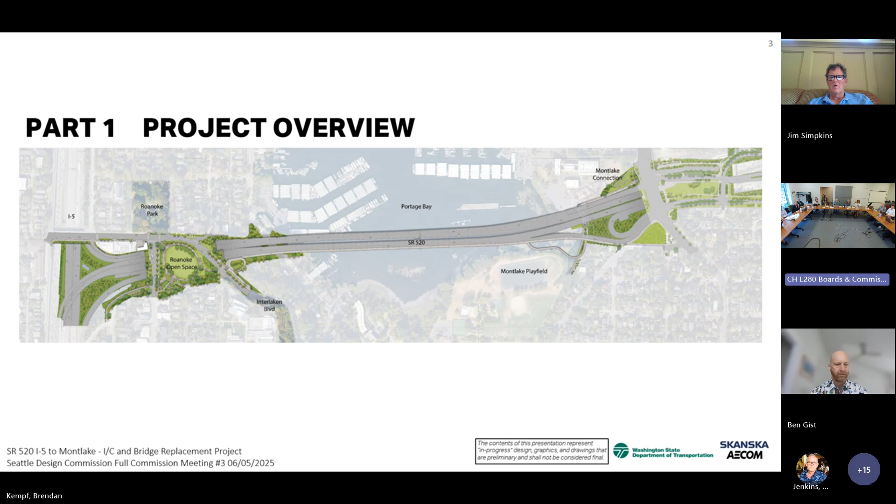Project overview. We've all seen this slide a couple of times now, but just want to highlight the scale and expanse of the project, picking up from where the Montlake phase left off, carrying the culmination of the 520 program across over Portage Bay into the I-5 interchange, and with our Roanoke open space, the lid that's going to reconnect North Capitol Hill and Roanoke district neighborhoods.

Zooming in a little closer, this slide highlights a number of key areas around the west side here at the interchange and the Roanoke lid. Central, of course, is this great lawn at the center point of the lid, the open space itself—really a connection from Interlaken Boulevard, the green belt there, to Roanoke Park on the north side. So really an extension of these legacy Olmsted Brothers parks. Tremendous opportunity here, very exciting for all of us to be working on, and just re-knitting this community, having this great central point here at the lid.

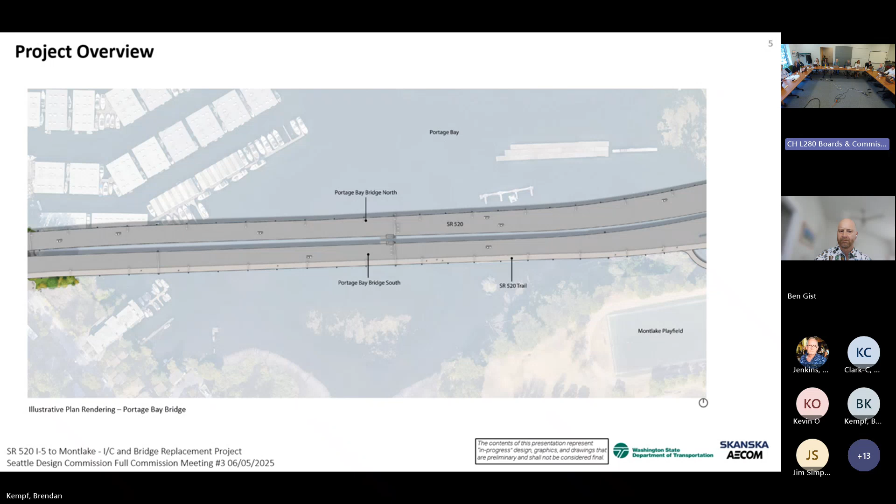Continuing across the bay to the east, we have Portage Bay Bridge, both north and south bridges. The SR 520 trail will be part of the south bridge, connecting all the way to points eastward into Redmond and beyond, part of a really large trail network. And then lastly, the eastern portion—you can see faded out slightly—the Montlake Lid area, the Montlake phase, and the connection in between. So really how Portage Bay Bridge is touching down on the east side of Portage Bay, and those connections to the local bike trails, as well as that regional SR 520 trail.

I already highlighted this—the three major elements of the west end: the Montlake Lid, the bridge itself, and finally the Roanoke Lid and that interchange area. Also note, we do have an additional bridge, the I-5 Roanoke Trail Crossing Bridge, which was the focal point of our very first presentation with you all. Also one that we'll be discussing in our next touch points, but not the focus of today's presentation.

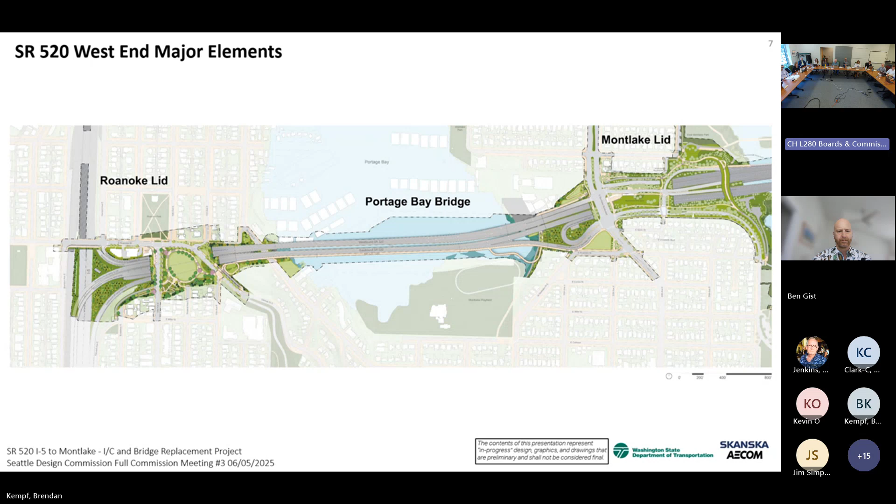A couple more slides here just helping to set the stage and highlight that regional trail network and the importance of what this project is bringing. So of course, the SR 520 trail going all the way across Lake Washington over to the east side, extending through Bellevue, Redmond. This is the last piece that's going to pick up from where the Montlake phase left off, get that network, that trail across Portage Bay and into all of these opportunities beyond, whether it's Roanoke District, North Capitol Hill, even downtown, East Lake.

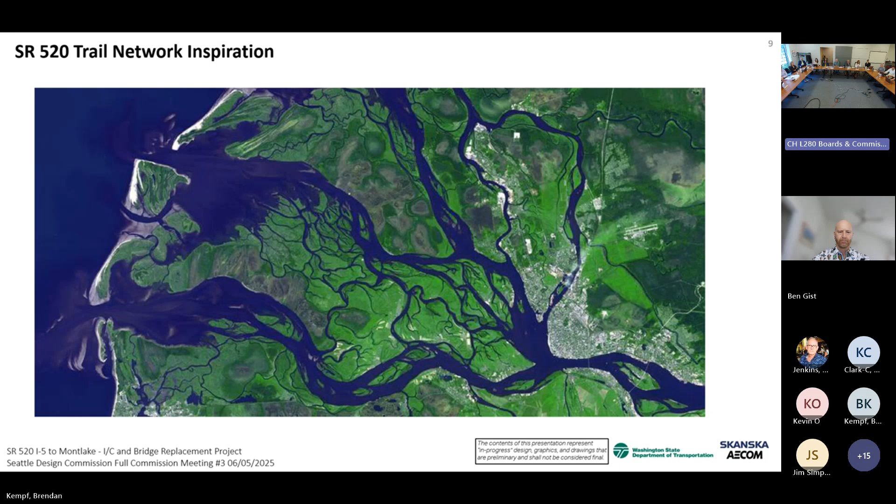By the time we get this image, it's kind of very representative of the initial design concept—as you arrive at this point, this delta, this distribution, all of these different trail opportunities that are going to emanate from this project.

So where are we today? You noted earlier the main thrust of the project really picking up in 2019 with the conceptual design, RFP development, and procurement. Today we're in the midst of the design-build effort, and so obviously continuing to have these touch points with the design commission, getting input and feedback along the way.

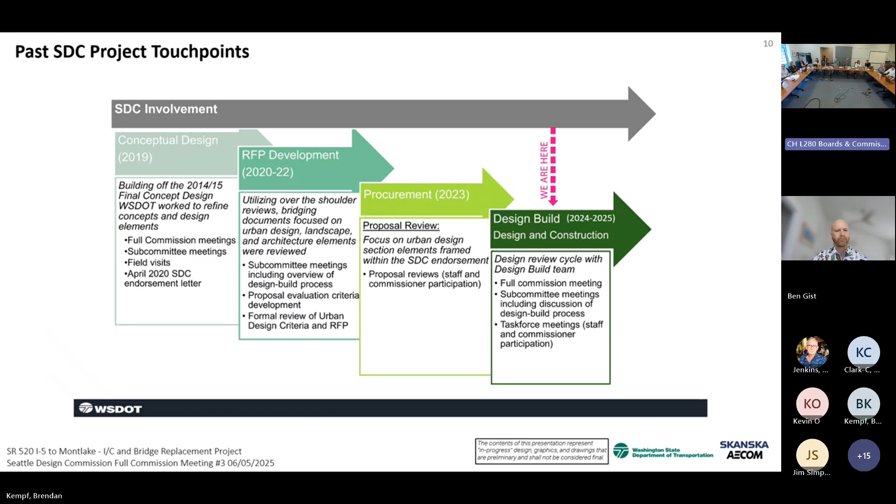Just to quickly step back, in terms of the delivery of the project, we have a series of packages encapsulating different portions of the project. We have three packages addressing the landscape architecture and urban design: the first initial package for the I-5 Roanoke Trail Crossing Bridge, then a west package and east package. Today we're really culminating on those two packages. We also have wayfinding, which will feature heavily today, bridge architecture—that was the focus of our last meeting—and then fire life safety building, which we'll touch on briefly today as well.

On the bottom there, you see the progression of the design submittal process. We are at this culmination point of the preliminary design phase, on the cusp of going into the next stage of WSDOT and City of Seattle design review, and then progressing into the final design stage.

This is the finer point: this is not the last time you'll see us, but this is the last time you will see us in the preliminary design phase. So this presentation is the culmination of all that. We will be coming back for an additional subcommittee workshop, as well as a full commission presentation, just like we're doing today, during our final design phase.

As we get various stakeholder and agency feedback after our preliminary design, we'll work on incorporating all of that, and as design progresses and refinements materialize, we'll bring that back to you for an additional update. Today our focus is really going to be project-wide on the landscape and urban design, touching on materiality and finishes, planting approach, focusing on portals and gateways, and the overall experience and how wayfinding ties into all of that.

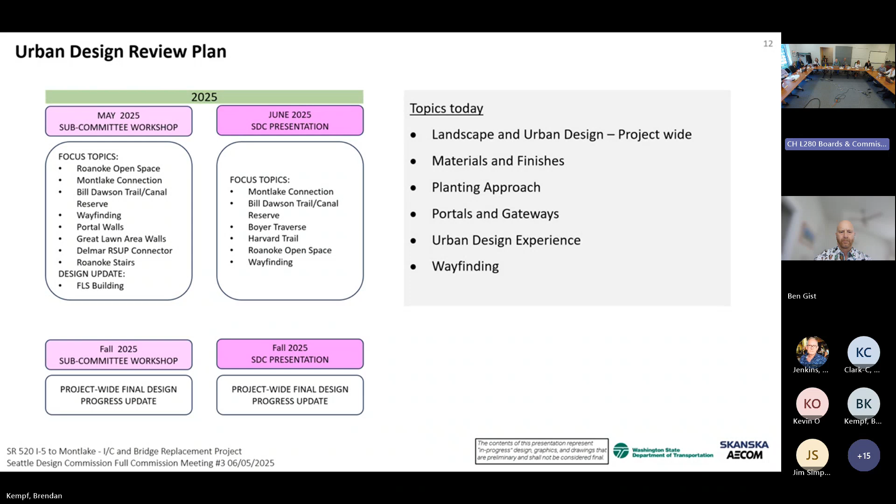Skanska, the builder for the project, is also hosting a series of annual open houses, with another one coming up this summer. Generally, these design packages will be passed along to representatives of that Section 106 group, and there will be opportunities for stakeholder review and comment during the preliminary and final design stages.

Jumping back into the overall connectivity—don't want to belabor this too much since we've seen it before—but highlighting again the multitude of connections out into the community from this project, centered on both the Montlake connection area and, even more importantly, the Roanoke Lid area, the terminus of the SR 520 trail, and all the opportunities out into the community and neighborhoods for connection.

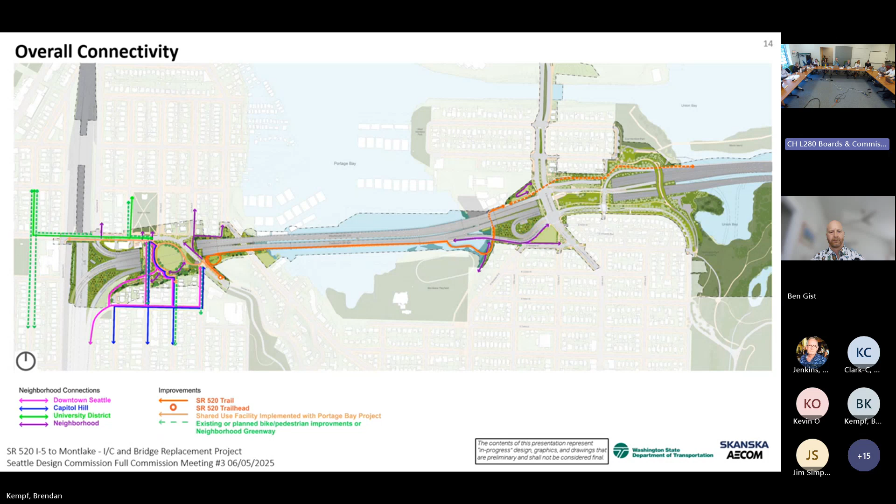This is looking a little more closely. You can see the more recent SR 520 trail segment dashed in orange, connecting through underneath Montlake Boulevard with the tunnel there, continuing on to what we call the Bill Dawson Trail and the Bill Dawson Underbridge area, which we'll see in just a moment.

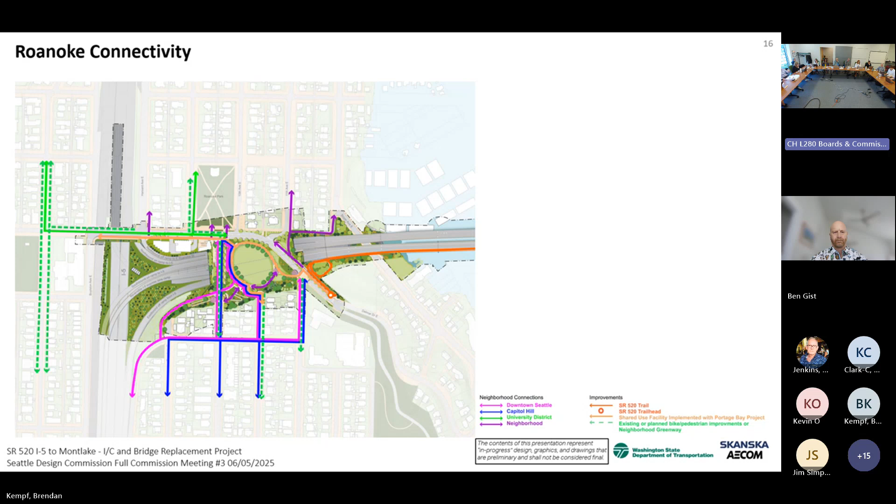On the west side, these dashed areas represent existing or planned neighborhood greenways that are going to be implemented, future bike trails and bike lanes associated with city streets, and connections into the Roanoke District, North Capitol Hill, East Lake, and downtown beyond.

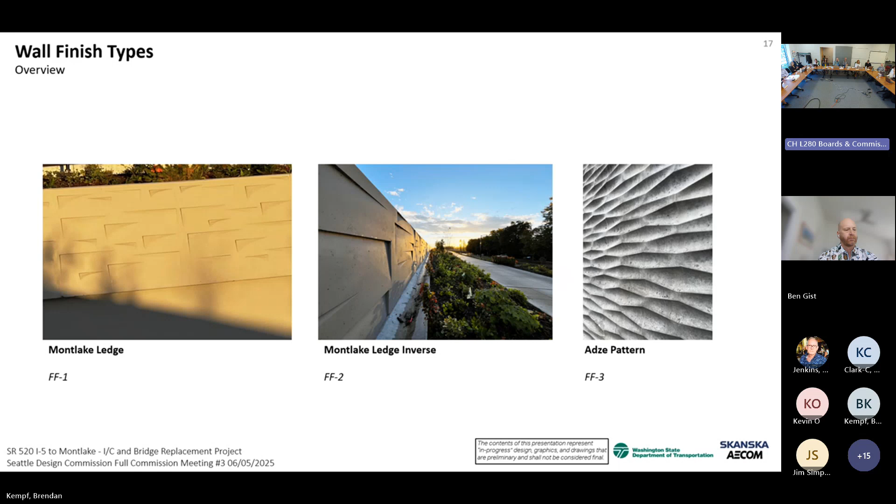In terms of general appearance, materiality, and finishes, this project in many ways is an extension of the Montlake phase, so we're carrying through some key design elements—the Montlake ledge pattern, and the inverse of that pattern, featured heavily on the roadway and roadside walls. For the more pedestrian-scaled walls, we're incorporating an adze pattern, a finer pattern more suited for the pedestrian-scaled spaces where people will be walking and cyclists passing by.

In terms of railings and lighting, the palette from the Montlake phase is getting expanded slightly. We've introduced a transitional fixture, part of the SCL standard catalog of light fixtures, that will feature on the west side of Portage Bay. The marina fixture is a consistent extension of the light fixtures used throughout the Montlake phase, so on the east side of Portage Bay we'll have that continuity. As we transition into the west side, the transitional fixtures will appear in many of the views of the study model as we go through this presentation.

What drove the move towards this transitional fixture was that it has a larger throw for light, so we need fewer of them, resulting in much less visual clutter throughout the open space and other areas. Also, for the bridge columns on piers 2 and 3, on the west side of Portage Bay, we have uplights that will help illuminate and accentuate those columns.

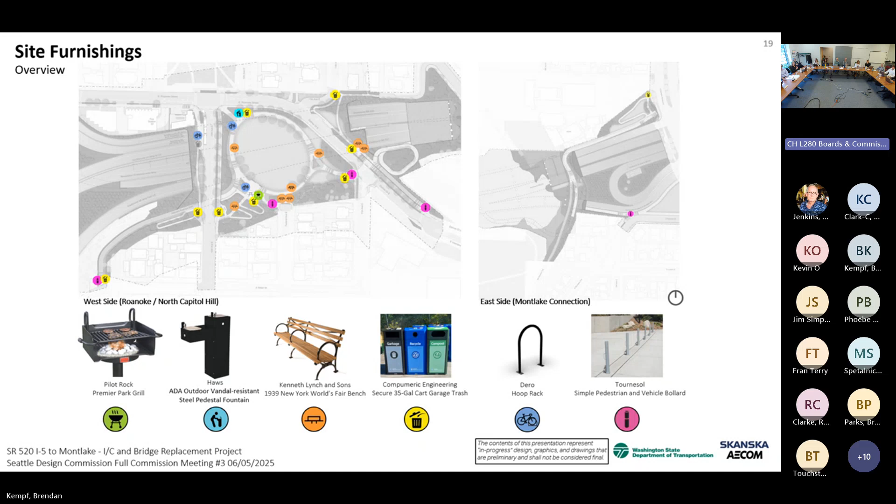In terms of site furnishings, expanding on many of the City of Seattle standard kit parts, we're introducing the World's Fair bench as a nod to the Olmsted legacy, originally designed as part of the 1939 World's Fair. That's a key element that harkens back. We'll also have a grill, drinking fountain, typical City of Seattle refuse collection receptacles, removable bollards at key points, and bike racks.

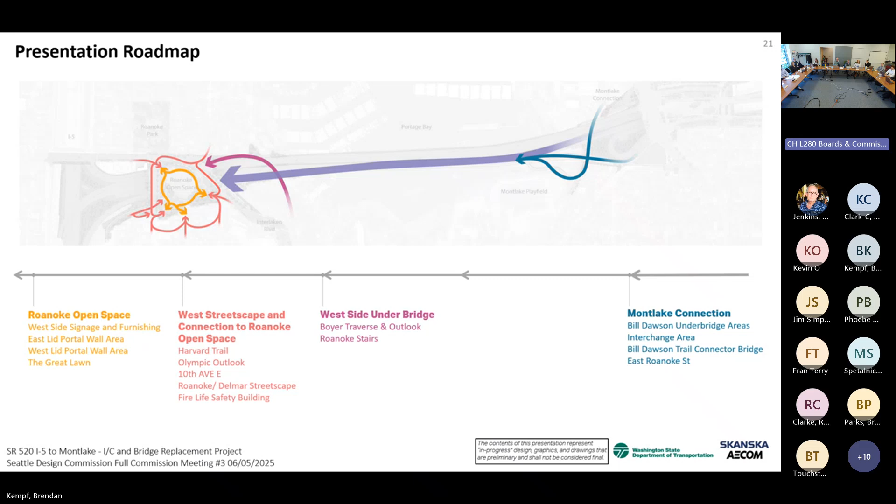Real quick, our roadmap: as described before, we'll start going from east to west with the Montlake connection area, quickly go over Portage Bay, the west side, the underbridge areas, streetscapes, the connections into the Roanoke open space, and lastly the Roanoke open space itself.

With that, we'll get started on the Montlake connection. As we go through some of these, we'll be harkening back to the original design concept and highlighting how the design has progressed along with some of the refinements.

So we don't have an additional secondary wall, and we avoid additional construction disturbances and impacts to the fencing at that NOAA facility. This reinforces the intended movement path for pedestrians and cyclists accessing the Bill Dawson Trail from above on Montlake Boulevard.

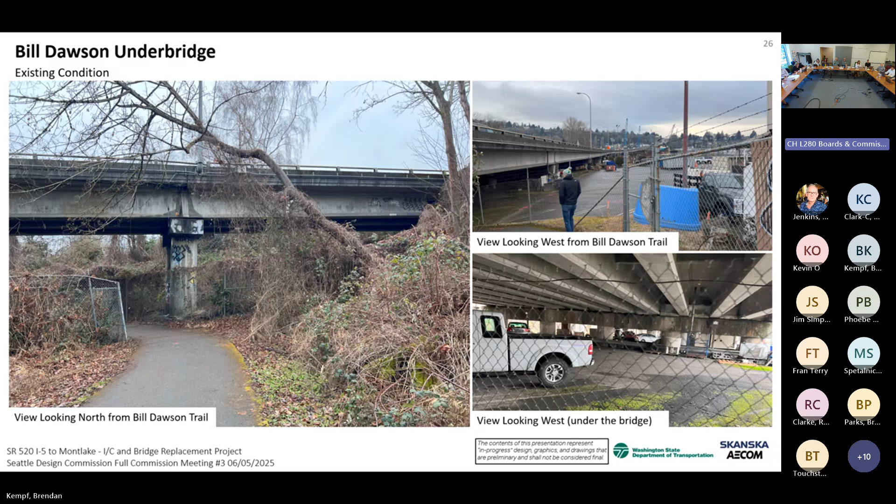This is what it looks like today. It's not the most inviting of places. It's been overgrown over time. You can see the NOAA facility is pretty much right on top of it. There's an area underneath the bridge today that is used by NOAA for some additional parking area, and just generally some kind of low head height clearance going underneath that bridge. So those are some of the challenges in this existing condition that our project is looking to improve upon.

This is the area underneath the mainline bridge, so both Portage Bay Bridge North and South, as they're touching down at the abutment wall that you see here behind this fascia wall.

All the walls across the project are numbered, so forgive me if I throw out a wall number, I will try to clarify all of those. But this particular wall is 90L. You can see that it's got this arcing, curving profile. It's also battered on that face, similar to some of the roadside walls, with its 10-to-1 batter.

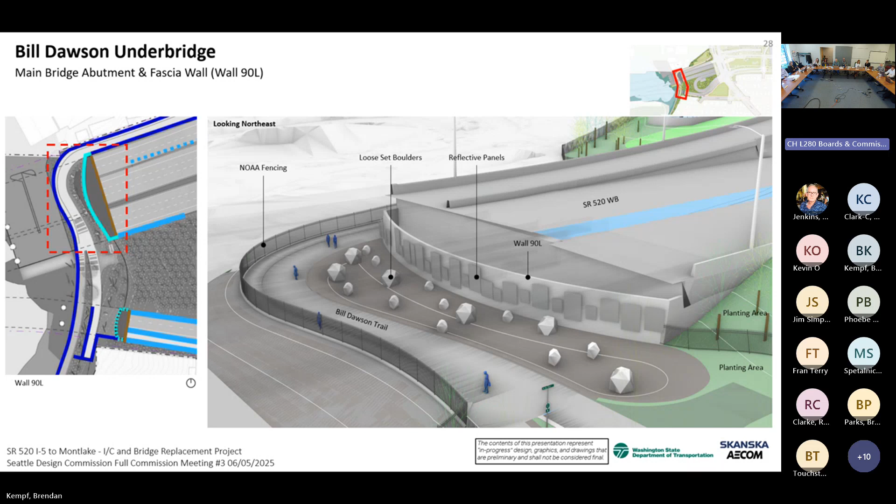This is new fencing, right? We saw in the images earlier that was primarily an unappealing chain link fence that wraps around. So we'll be picking up on the design language of the wrought iron picket type of fencing along the majority of the NOAA property and carrying that on through to help secure that parking area. We'll talk a little bit more about that in a moment.

Going back to these reflective panels, it's a series of stainless steel panels that will be mounted to that wall. There will be lighting in the girder bays that provide downlighting directly over the path, but there will also be girder wash lights pointing back towards this fascia wall, helping to reflect light back and off these reflective panels so that there's more light being displayed and bounced around in this space.

So it's not like there's a dark area off of the trail. We're trying to make sure that there's a good, consistent light level all the way through, so that this doesn't have that same underlit or dark quality through it. It should be very well lit.

As people are moving past these reflective panels, you'll see that subtle effect - it's not a mirror finish, so you won't be able to comb your hair in front of these things, for instance, but you'll see the color and movement will still reflect off of these and help animate that space. Of course, we're getting into all the details of exactly how these things come together, being mindful of serviceability, how they'll be installed, and how they'll be able to be maintained in the future.

The stainless steel elements also include a component of bird netting that helps keep birds from being a nuisance in that open space behind this fascia wall and the abutment wall itself. That open space is critical to the bridge preservation aspect of the project, so that there's access into that space through a man door, so that inspection personnel are able to inspect the bridge and the abutment as needed.

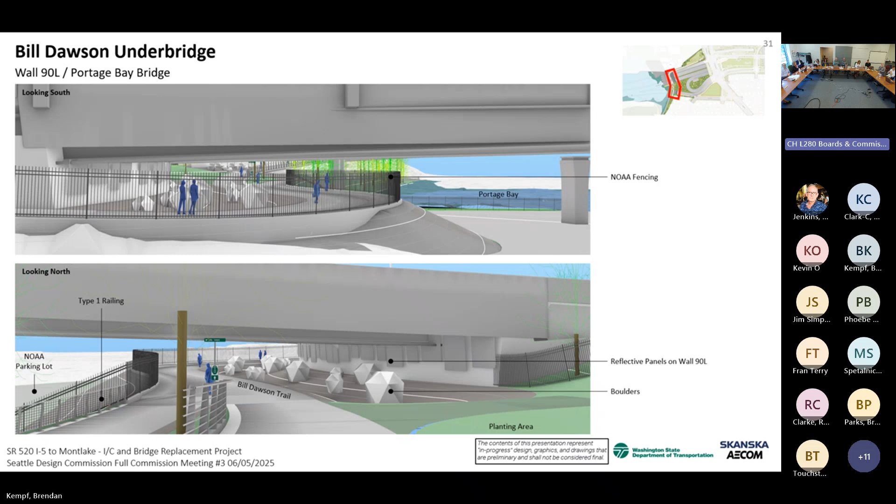Couple views here, looking at that space. This is pulled from our study model that we've been using to explore all of these areas. On top, we're standing inside the NOAA facility, looking south underneath the bridge, and you can see the fencing as it goes through. On the lower image, looking directly opposite, from the sloped walkway that leads up to a bridge connecting to Portage Bay Bridge itself. So you can see into this space from both directions, as well as a more photorealistic rendering highlighting the space.

I know scaling was a topic at our last presentation, and that's one of the things we've been very focused on truing up since our last touch point with you all, moving into a series of more detailed sections through this space. I think this will help highlight really what the scale and dimensions are through this area.

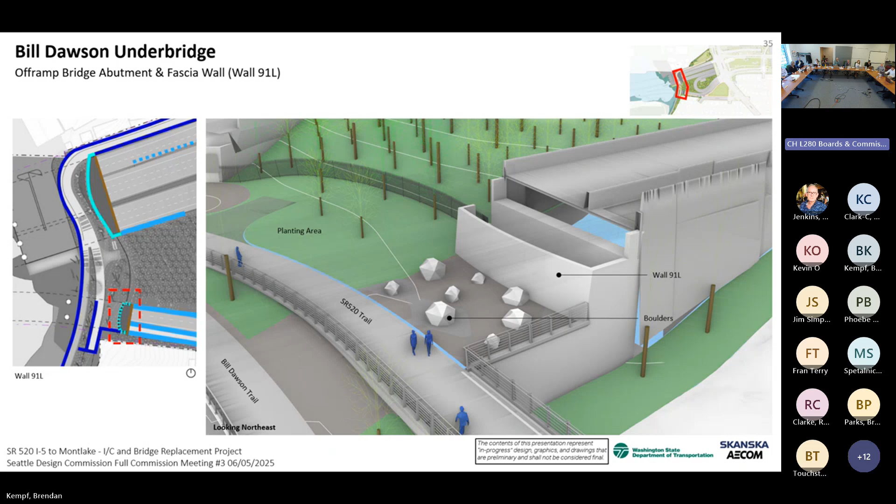Transitioning to what we affectionately call the WABN railing, which is from the West Approach Bridge North design language, that carries through alongside the SR 520 trail. Since we're transitioning onto that trail officially, and then another bridge structure, that railing type starts to come into play here.

Where do you lose the NOAA fence and where does this one start, and what is that intersection? Excellent question - there will be a graphic in a moment that'll better illustrate where those come together.

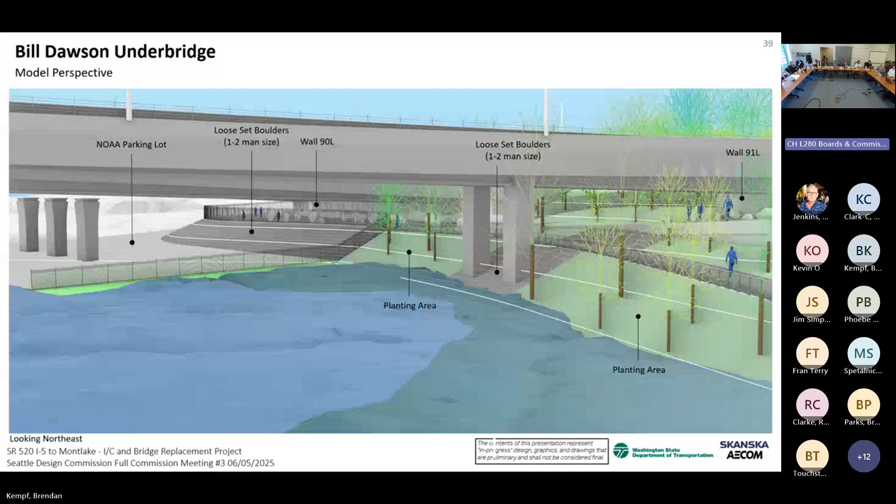For the areas underneath the bridge itself, something we're still working on refining, but trying to pick up on the same rockscape design language that we have on the other side of the trails in front of those abutment walls, and carrying that through. These are spaces that are not going to get as much light, and more importantly, aren't going to get any natural rainfall, so viability of plants in those spaces is next to nil. So we're carrying through that rockscape theme for the underbridge zones.

This is another view looking back through this space. This is pretty much that section we were looking at a moment ago, where we're standing at that interface with the bridge structure. You can see the shadow line and the rockscape treatment directly into the abutment area. There will be habitat logs as well as boulders set in that space. You can see the WABN railing type here, a little different from the pedestrian railing, but carrying through to the terminus of this portion of the trail as an extension of that bridge railing type.

Also touching briefly here on the interstitial space in between the bridges. This area is solidly within the highway zone itself. This is the on-ramp from Montlake Boulevard to 520 eastbound.

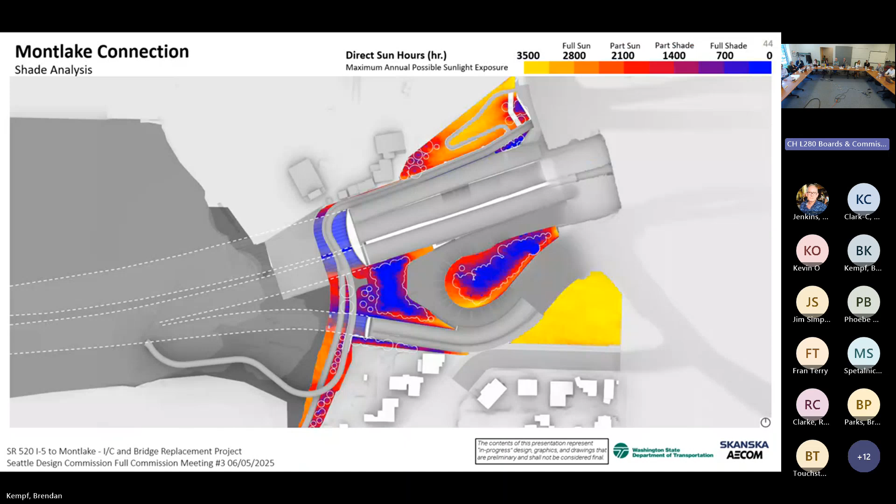In terms of the planting design, one of the things underpinning the design choices here is looking closely at shade analysis throughout this area. We're being very mindful of where we're up against tall walls, creating really shady zones. You can see the areas directly under the bridge are quite shady indeed.

Where there's some more open spaces, for instance over at that Montlake connection area, that switchback trail, it's more open where there will be some lawn spaces. We're continuing to work with landscape architects, with WSDOT, with Seattle Parks and Rec, as well as Seattle DOT for identifying and being on the same page with what the plant material will be, being mindful of maintenance considerations from each agency, as well as the microclimate conditions that will be created by the project. You'll see a series of these kinds of diagrams as we go through the presentation—it's one of the main things underpinning that planting design approach.

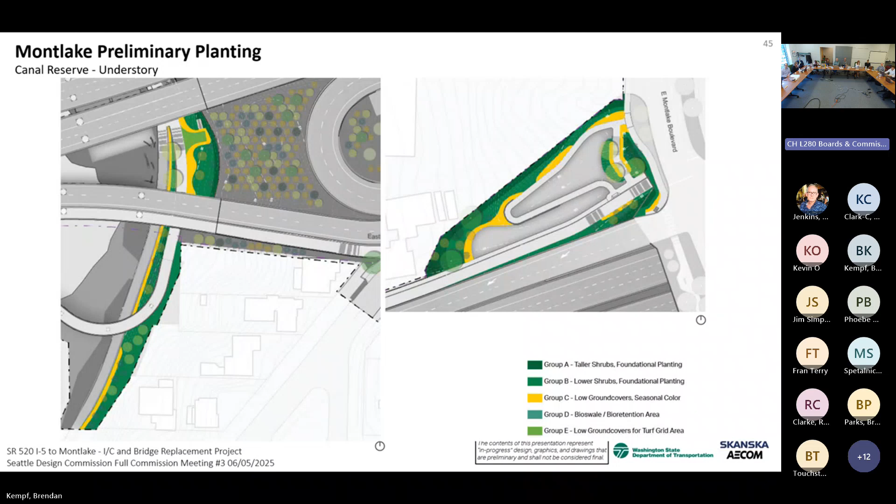In terms of the approach, it's really a matter of layering the plant material. Where we are against or near pedestrian zones, we're looking at lower plant material, being able to introduce seasonal color and accents, so it's a little more interesting. Then as we step back, we start layering in more foundational plants, lower shrubs, and ultimately taller shrubs when we get out to some of the edges of the project. So it's very much an outward progression of height, density, and layering for that plant material.

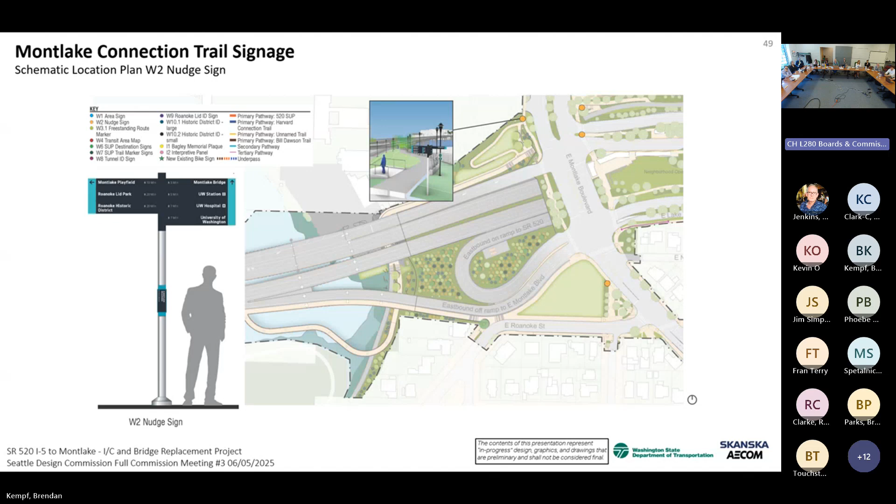And then we're also locating the nudge signs in several areas as well. Pedestrian oriented signage on the periphery, and then when we get into the trails and stuff, it'll be more bike oriented signage. And then there's a tactile portion that goes on both the area sign and the nudge sign.

So that we're starting to get those laid out and what those are going to start to say.

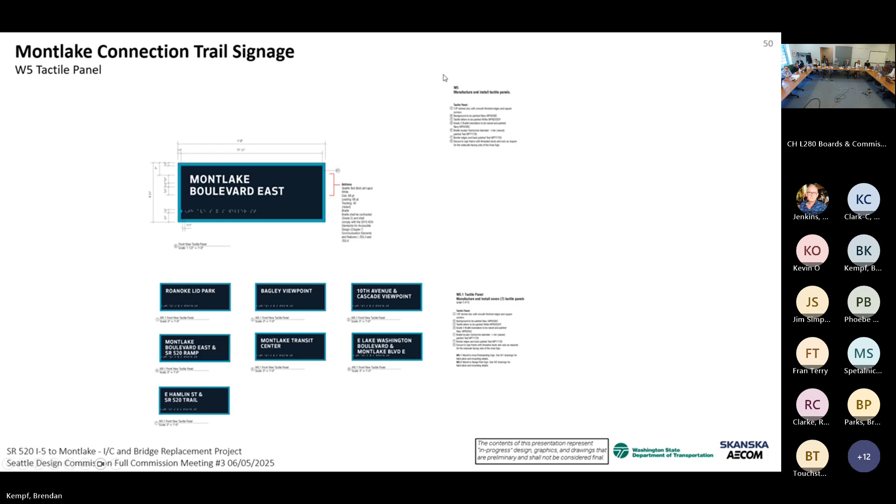And then we've taken vignettes from the model to indicate where signs are going to be going, what they're going to be looking like in that space. We've also identified where there's existing bike signage from the Montlake project. It's already out there, so it's a little bit of an overlap for the scope of work that we have, to where they're kind of meeting up. So we know where those continuations are happening from one project to the next.

Again, the Montlake tunnel identification, and then the transit area map that will go into the transit center there, Montlake.

Picking up from that, the Montlake connection area, we were looking at the underbridge zones, that split where the Bill Dawson Trail happens and continues to the south, and then the elevated path that is really the SR 520 trail that leads up to Portage Bay Bridge South.

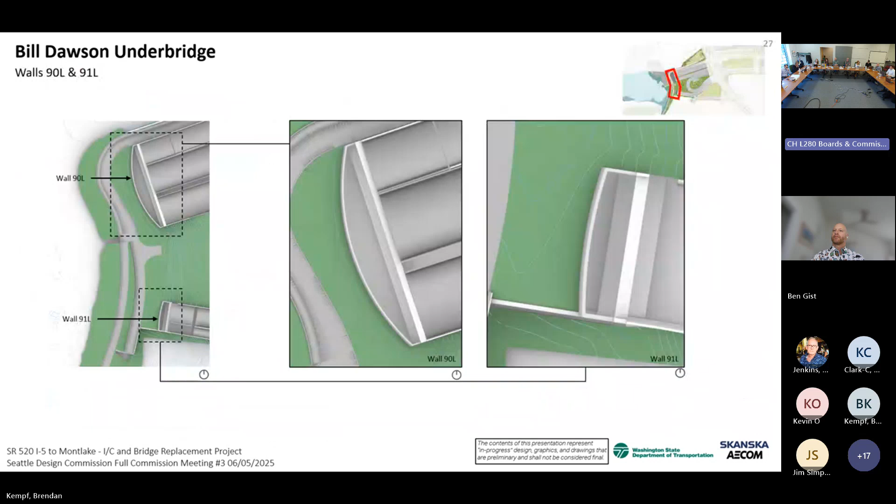I'll jump back here for this, this might actually be the best plan view to look at for a second. We're kind of starting from the Montlake connection area, there's a slightly raised sidewalk alongside the 14-foot wide path through the tunnel. That continues all the way through the underbridge area until basically just beyond where the NOAA fencing ends, and that's really where the two trails are going to split in that space between the two bridges.

We'll go back to this section. It's effectively 21 feet from the east side of Montlake Boulevard all the way to the Bill Dawson Trail, and this is where we start, the two paths are starting to split apart.

For the portion of the Bill Dawson Trail that's being improved for this project, it's going to be a 12-foot wide asphalt trail with a 1-foot wide concrete containment band on either side. It'll continue with, for most of that, alongside the pedestrian railing here, there'll be a 1-foot wide band, and then we have a 2-foot gravel shoulder on the side of that 12-foot wide segment. There will be places like here though where pedestrians and bikes are mixing together in the same space.

So will you have signage encouraging cyclists to slow down, or separating bike and pedestrian movement? Just curious what the strategy is there.

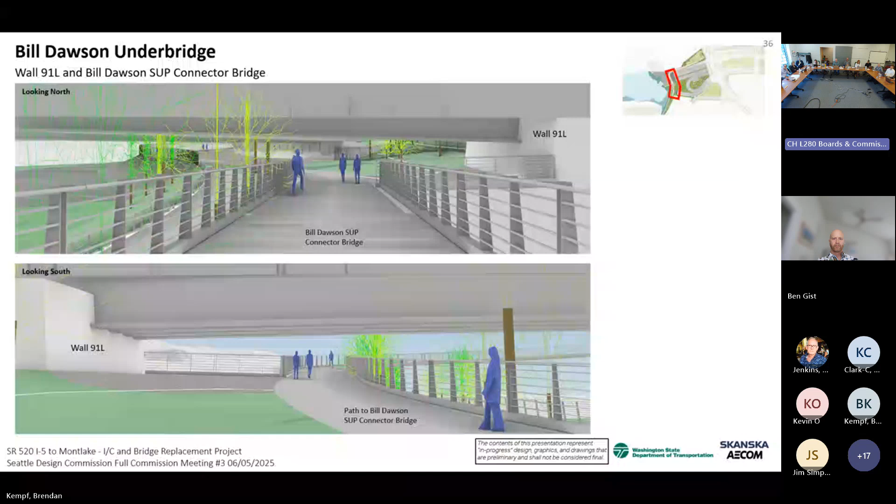Related question—could you go back a couple slides to where you're showing the ramp and the section? This one? A couple before you get to the underbridge, where it comes down from Montlake—the concept plan of the canal area.

So this ramp—is this pedestrian and bike combined? I'd say it's primarily pedestrian. It's not a ramp in the true sense, it's a sloped walkway with no landings, less than 5% grade. This is not a primary cyclist route, it's meant to be more of an accessible pedestrian route instead of the stairs. The anticipation is that most cyclists will come through the Montlake Tunnel rather than arriving from Montlake Boulevard above.

There are some other connection opportunities a little further east as part of the Montlake project, and there will be signage indicating that. For me, this is one of the examples where the primary flow is very clear and the secondary flow is almost like a T-junction stop sign, where people add to the main flow when appropriate.

The one under the bridge is something we've never really seen clearly—could you show when these things split, and which is primary and which is secondary? It's a little further down. Can we circle back to that one? We've actually got a good graphic that'll highlight what's happening there.

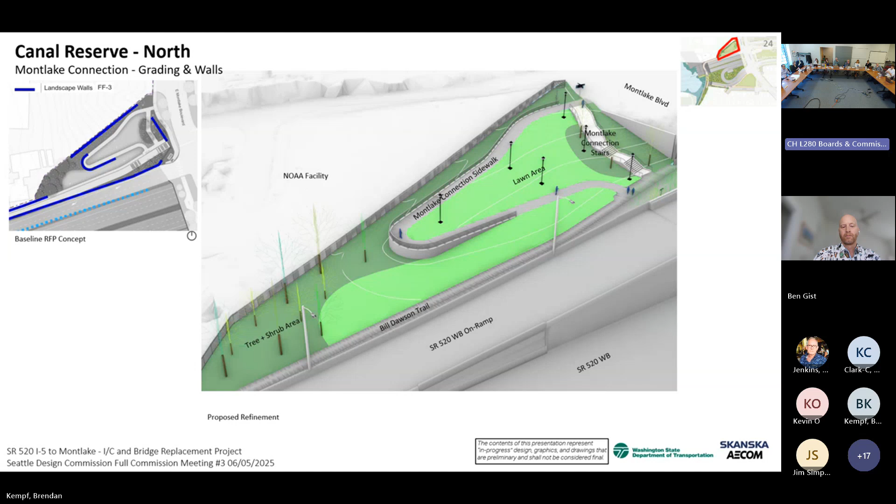And then under the bridge, we have NOAA and a different railing—are there two pedestrian railings that come into play under the bridges? Are they the same type? There is one type of fencing, but two types of railings: the Montlake/Portage Bay/Roanoke pedestrian bridge railing, and the Wobbin railing, which is the primary railing type on Portage Bay Bridge itself and continues through. The difference is the bridge railing has 1-inch horizontal tubes, while the parks railing uses cables.

This render seems very light and airy. That's the cable - this is the Wobbin railing type that's on Portage Bay Bridge and the Bill Dawson connector bridge. It is a little bit subtle when you're zoomed out this far.

The railing that's down along the path will be that kind of combined Montlake and Roanoke style, with cables instead of bars. The stanchions are a little bit different, but there is some similarity in the design language as far as some of the angles.

Are the lower ones existing? No, those will be new - they just match the other Montlake things. And the railings on top of the retaining wall will be nearly the same as what's along the Bill Dawson Trail here, along the lower section with the cables. Dawson's railing is more continuous.

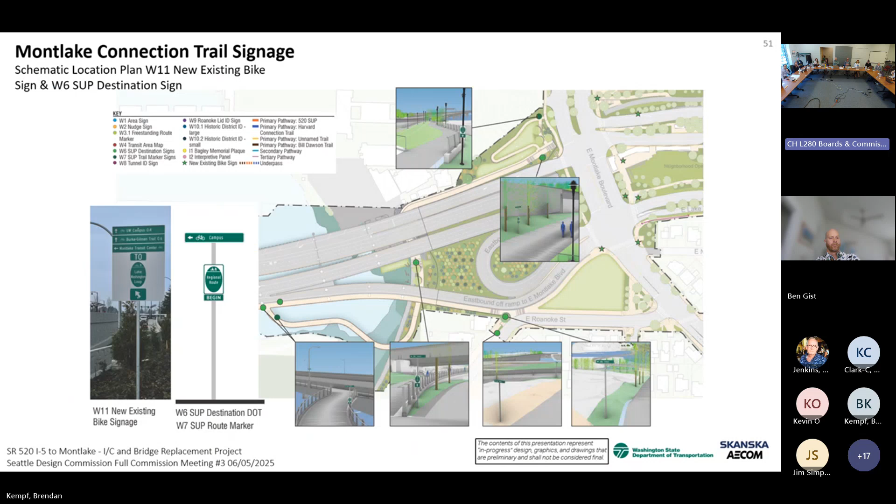That will switch from that railing to the NOAA fencing, but then you will still have the same railing again - no, they will not touch each other. These two touch each other at the right angle. The NOAA and the cables touch, and the Wobbin is in between - the Wobbin is structure related, and the cable is ground related.

Where the two trails divide, where they come together, that's where the Wobbin will start and go up, on both sides as it goes up. Well, it starts out just being on a single side, but once you have a fall on both sides, it'll be there.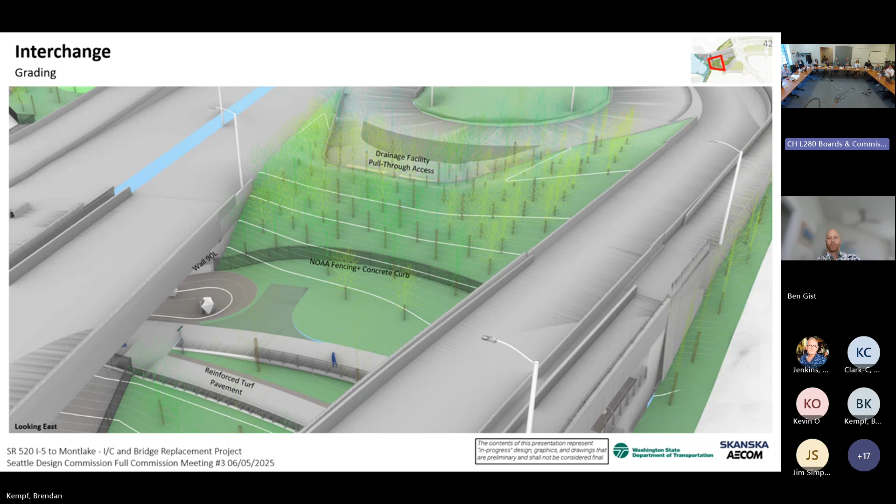There is a view of that corner of the trail. It does relate a little bit to operations and maintenance, who owns the asset. We're trying to keep the same styles that were established for Montlake all the way through this - the shared use path, which is maintained and operated by WSDOT. We're trying to use that same bridge railing that starts out at the floating bridge all the way through up to Delmar Drive.

So this is actually probably the best graphic here of where those three elements are coming together. You can see the NOAA fencing here under the cursor, that pedestrian railing, the cable railing that we saw that is an extension of the Montlake project - it was on that switchback path. It's gonna be part of that lower experience, adjacent to that shared use path there.

And then as the pathway up to basically the SR 520 trail, as it's climbing up towards the Bill Dawson Trailbridge connector, it's pulled back a little bit from the confluence right here. And then once we start approaching where there's actually a fall off that edge, that railing comes into play.

And then at this pull-through, imagine there's another fence. No fence there - no pedestrian access. No pedestrian, but there's big cars, and there has to be some sort of barrier. Well, there's a pull-through that comes off of the on-ramp itself, right? I'm sure you've seen that kind of scenario at any number of places along highways.

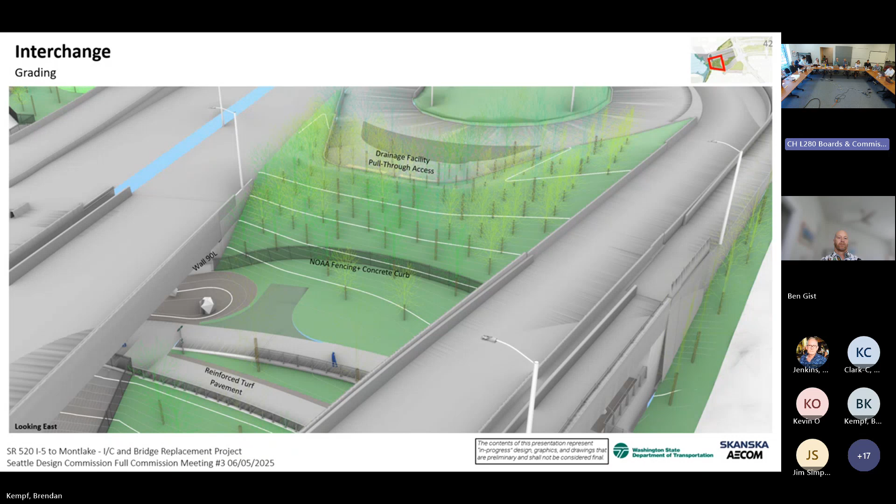Before these two trails split apart and become too narrow or go onto a structure, there's a zone where they can pull off and do the turning movement they need to get back out for the Montlake section. Okay, so those are - it's turf? It's concrete block with grass growing amongst it, so it can take the vehicle load turning on top of it. Okay, cool. Could you go to the rendering of the underpass?

Yes, this one or the other? The underbridge with the mirrors. Reflective panels, yeah. Could you - is there a motivation behind the irregular sizing of the reflective panels? There is, it's a matter of modulating those panels so they're not one single size. There's a little more dynamism to them. They also - I'll go back a couple slides here.

One of the key things, there's three modules in play. Where they're positioned in between the girders, they're taller so they can extend up into that girder space, which will draw your attention rather than having an open space between the girder bay filled in with bird netting. So it's more trying to create visual interest and take advantage of the space available between the girder bays, to have more surface area that can help reflect light.

Could the smaller panels extend down further to be flush? In theory they could, but one of the motivations behind their placement and situating them a little bit higher up is to reduce the potential for vandalism.

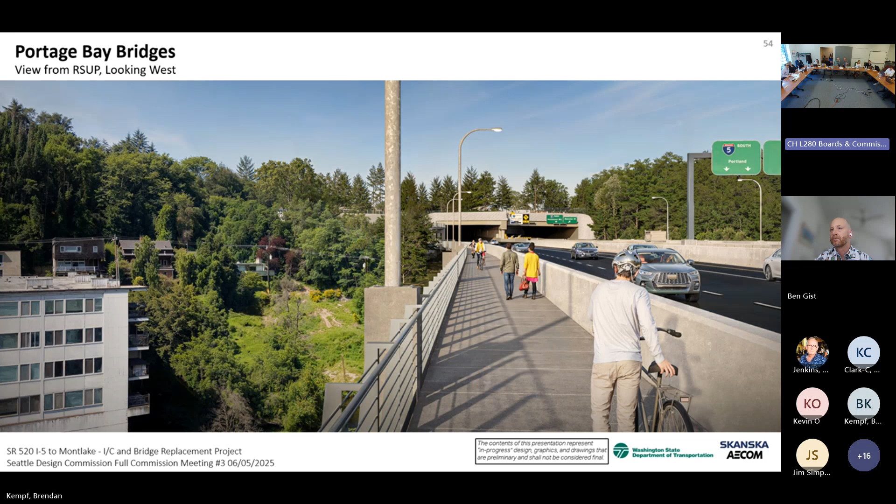So continuing our journey westward, crossing Portage Bay, as we get to the far west side of Portage Bay and the Portage Bay Bridge, we will arrive at the Delmar RSUP connector. We have been affectionately calling it the corkscrew, and you'll see why in a moment. One of the challenges throughout the project is the amount of grade change that's happening, so this structure in particular is helping us get from the level of Portage Bay Bridge up to Delmar Drive, and so it winds back on itself. There's also some significant spatial constraints in terms of available right-of-way and adjacent properties, so we are pretty much maximizing the work area that we have available to construct this.

And on the left side, we see the baseline RFP concept. I'll highlight quickly a few of the key design refinements that we've worked through, and then we'll see in a little more detail how that plays out in some of the 3D views. So a couple of the more subtle things that have happened here.

We've got the mixing zone paving between two different levels that line up. In the initial concept, there were two portions of this, including at the upper level - basically the sidewalk along Delmar Drive - that were to be asphalt paving. You can see that indicated in the darker gray tone here. One of the things our team is doing is that we will actually have that all cast in place concrete paving, so there will be a consistent material, and not introducing an asphalt pathway up at the street level either.

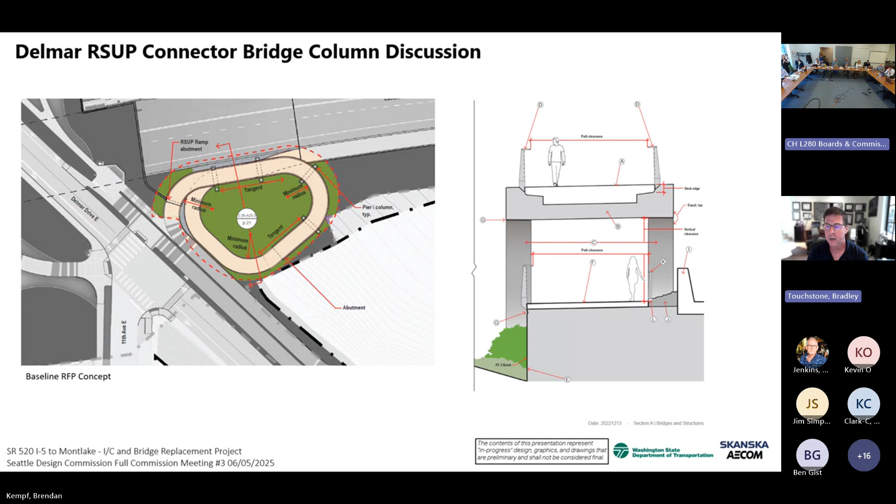The first thing we looked at is whether we could replace those two-column piers, what we call straddle bents, with a single column pier. What we've determined is that because this is an incredibly tight turn that upper deck is making, that superstructure actually behaves like a slab or a tabletop, evenly supported by the transverse beam of that straddle bent pier. If we switch to a single column, because of that tight radius, we'd introduce a lot of rotational force into the superstructure, and it would no longer behave like a tabletop but like a beam. That would mean significantly increasing the depth of the superstructure and introducing post-tensioning tendons, and because of the radius and congestion of those tendons, it really became a non-starter. We determined that we need to keep that twin column configuration so the superstructure can continue to behave the way it does.

So we then looked at, on the next slide, whether we could move the columns in a bit more closely. This was a pretty quick exercise with the structural team. If we reduce the separation between those columns - right now we're required to have at least 4 diameters of separation between the shafts for the foundations - reducing that spacing trickles down into the foundations and has significant structural implications. So again, we found that the baseline concept was spot on in terms of how it was configured.

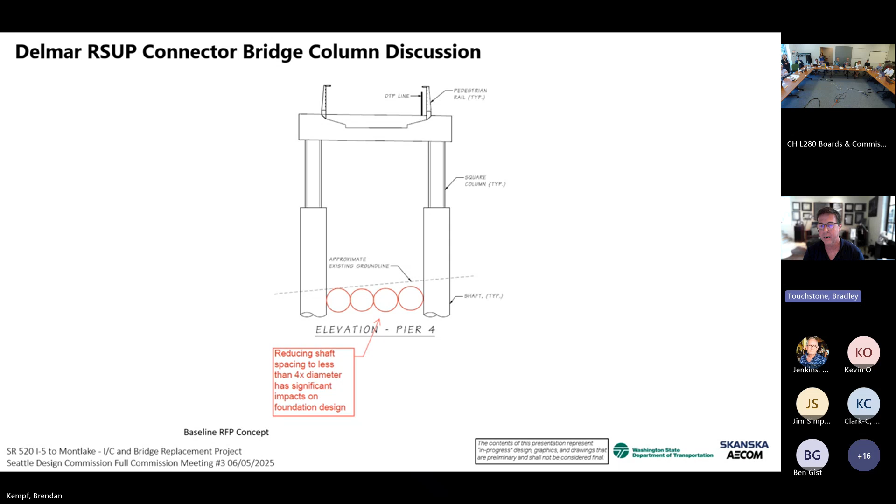Finally, we've been looking at the configuration of the columns, and I'll point out there was a discrepancy between Appendix L1, the aesthetic requirements, and Appendix M1, the reference structural engineering drawings. On the far right-hand side, you'll see the column and the beam that spans between the two is flush, with that flush face. Whereas in Appendix M1, there was actually a bit of a step, and we've determined that step is actually quite necessary.

The reason for that is because of the seismic design, we've got to push the plastic hinge for the structure down into the column, which means that beam has got to be quite a bit stiffer and stronger than the columns. To achieve that, the horizontal rebar that goes through that column cap has got to be fully developed before it gets into the zone of that vertical shaft, the vertical column. So it really does require about a 1-foot extension on the outside of that column beam.

We've looked at, can this be a pinned connection? That was what we found, was that actually created a lot more trouble. So we've determined that in fact the baseline concept was one that was very valid and is what we're going to pursue. We talked briefly during a task force meeting about the possibility of creating some artificial thickness to that column, basically an architectural pour that would extend the width and create that flush connection. We're still looking into that.

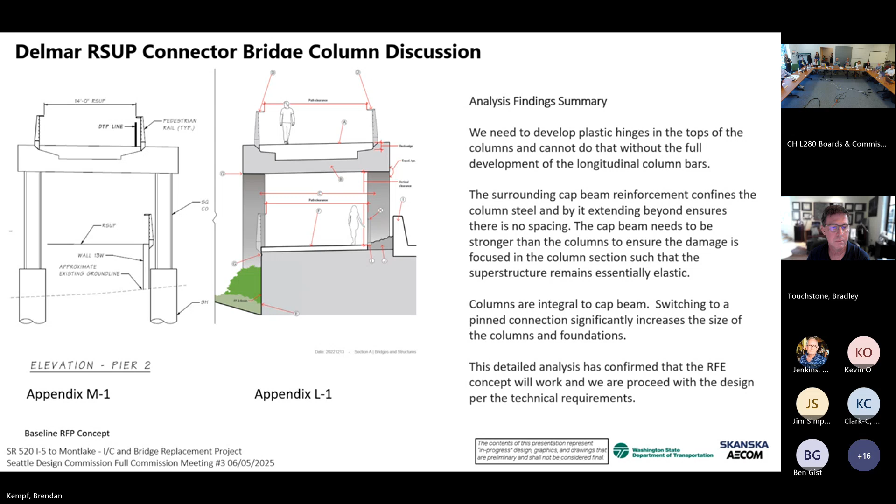Can we look at slide 54, or at least it's 54 in the draft that we received, just so we can talk about from where you will be viewing this? That's what I'm asking. This one or the one on the bridge? This one, sorry. This is the one that I was looking at, but if you also have better ones from when you're approaching it from below, you could look at that as well. No, I think we're a little too far on that.

Looking at it from that path down below that runs off of the page on the bottom right, and also at that mid-level view - right now we're looking at it from the view that tells us it's a problem, but this is the helicopter view, right? I mean, that's my argument - I'd tend to think this is not a huge issue. I feel like this is the only view we've seen it from, and this is when the comment was generated.

Otherwise you're seeing it from the lower path, but you're passing under a straddle bent on the path itself. The ones off to your left, the closest one to you, you will see - but it's also precedent, because you'd expect and anticipate to see that. I just don't think that if the choice is we're not actually going to see it, and you choose not to upgrade it, that's fine, but I don't want to preclude this on a technical merit.

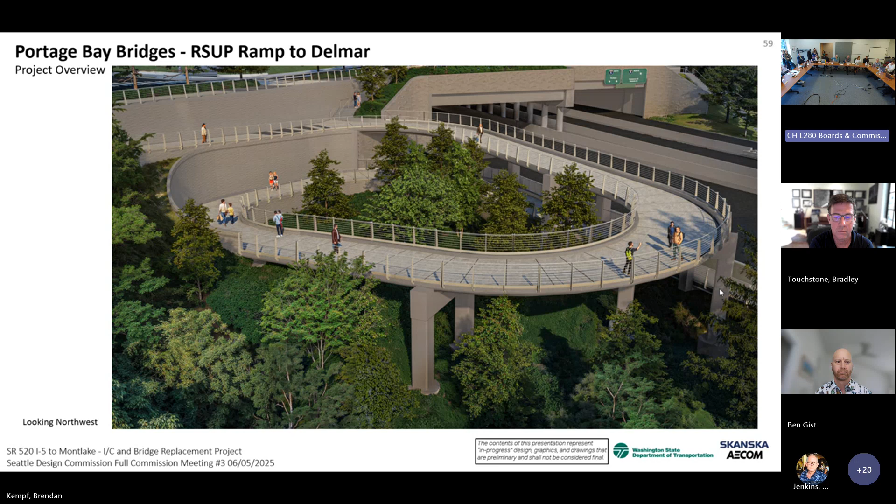Next question - that stairway that goes from street to top of one spiral, but not all the way down, what are we getting out of that? What are we getting out of this particular stair? It's a shortcut more than anything else, but then you still have to go around the full spiral if you're going to go on the trail.

So it gets you halfway into the problem. It keeps you from having to go, that long switchback movement down and around - the desire path. That's about a block of length that you travel off.

But we're not doing it down again and getting onto the 520. Correct.

Is the seatwall portion that's closest to the right, if we're going to the right - sorry, I can't help myself - is that really big enough to accommodate use? Because as it flares to the stair, someone could actually sit there and have a comfortable place. As you're approaching the wall, is that even a comfortable place to sit?

You are coming up against a wall for sure, but that seat wall is set back about 2 feet - enough to sit there and have your toes out of the way of cyclists, without coming into conflict with the traffic. Exactly, and that was one of the two things driving how we pulled that back.

The second one being the bike runnel. So in the original alignment, there was the potential for, as you're trying to shoot down, your pedals are going to clip that every time. So we pulled that portion back just behind where it intersects with the bike runnel, so there's no pedal collision opportunity right there.

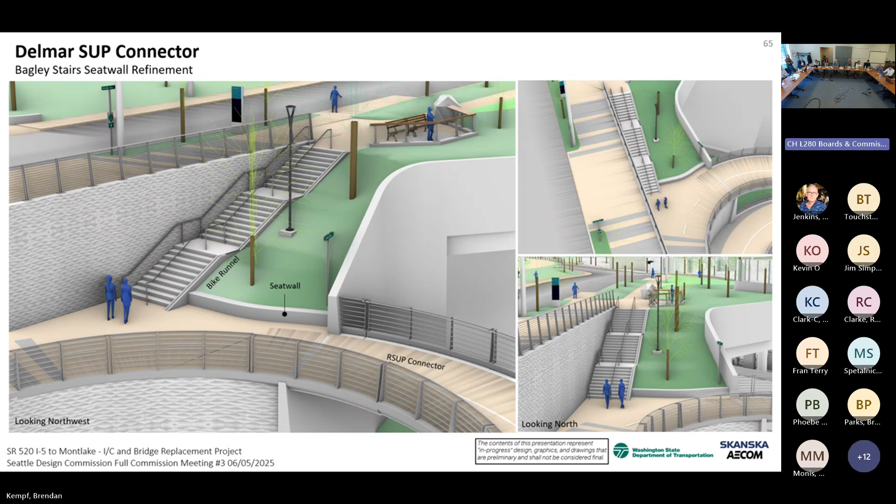Briefly, some of the planting through here, because the slope is sloping down at a good clip through this space, all the way down to Boyer.

One of the things that I'm actually quite excited about for this area is that as people go around the loop and climb here, you're actually going to have an experience of being right there at tree canopy level, which is always kind of a neat experience, to actually be right there next to the tree canopy.

And especially having quaking aspens in there, just the movement of those leaves, especially as they turn colors in the fall, will be a really special and exciting moment.

We'll also have bitter cherry, vine maples, spruces for an evergreen foundational component, as well as dogwoods that will lend some spring color or blooming to help animate that space.

Did you do solar studies on that? We do have a solar study on that, yes.

Well, a couple more slides. As far as the trailhead, this is what I was alluding to with the transition between the two railing types. One of the things we discussed in our recent workshop was what this terminus would look like at the trailhead, and what you see in the baseline concept is kind of this sharp angle that ties back to the city sidewalk there.

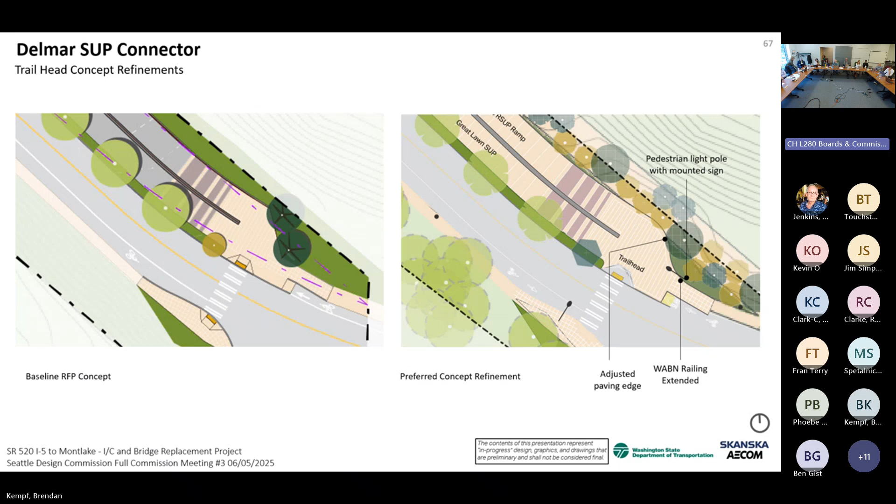Why aren't we carrying that through as part of the transition and how this ends? So we took a look at that, and it works. It actually works a lot better, I think, in a lot of ways.

It's a subtle change. In some ways, it's still following the same general spatial parameters. It hasn't gotten significantly wider. We're not necessarily creating a ton more space, but just by virtue of having that arc in the foreground there, that transition just feels more open, and it also feels more inviting for people on this northward route. If they make a subtle bend to go down the ramp, it just kind of invites you in and down along rather than having kind of a point right there.

So in terms of the true geometry, if we all went out there and measured it, the change may not be terribly significant, but at least just the perception, the user experience going through here, this is absolutely an improvement and helps it feel a little bit more open.

And this is that area I was alluding to where those two different railing types come into play. They don't touch. These two railings never touch as a transition, but they do effectively demarcate the zone. That's kind of the extension of the WSDOT portion of the trail, the bridge structure, terminating at this point. Truly the structure terminated a little bit further back, but we do have the significant retaining wall that's coming along here, and then transitioning into another significant retaining wall, but one that's on the back side of effectively the city sidewalk there. That is the full 14-foot width of a typical SUP as you're heading north from this point.

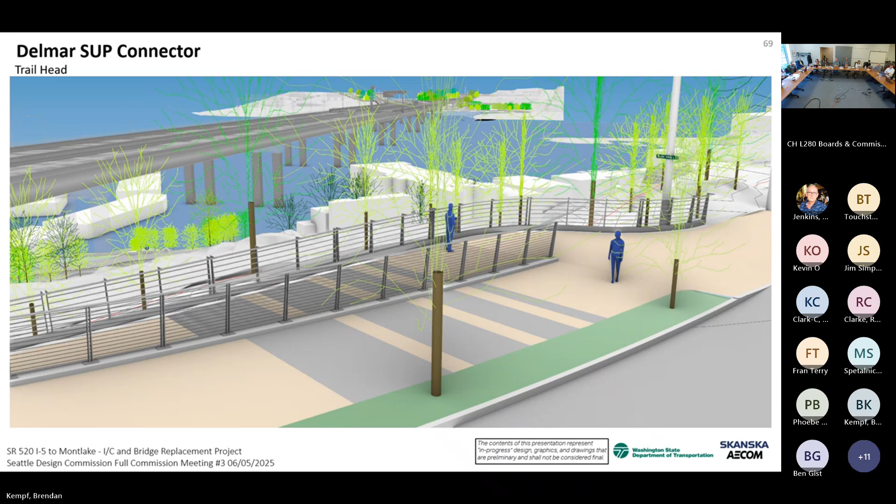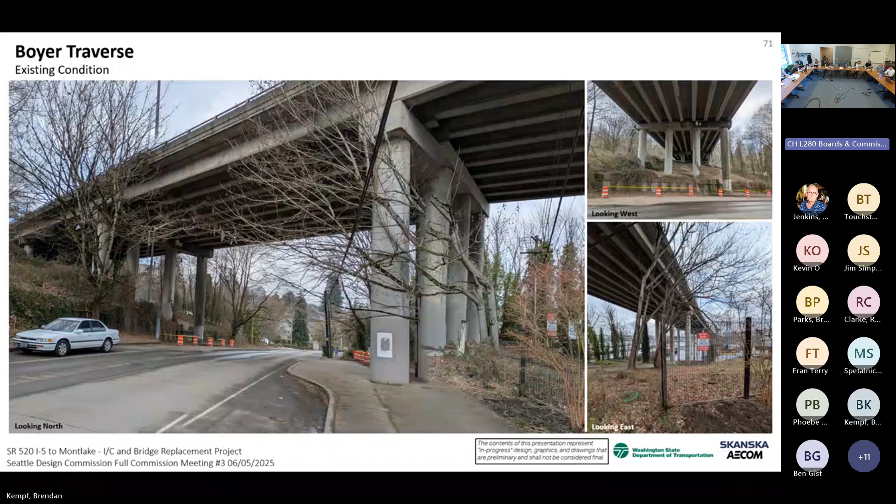Let's jump down to the next major area. So we're going down the hill now, looking at the Boyer Traverse. This is Boyer today, the existing condition—the bridge columns are right there, and they're part of the sidewalk experience today. One of the things that will be changing is that those columns are going to be much further back, so this will be much more of a pedestrian-focused zone as you go through here.

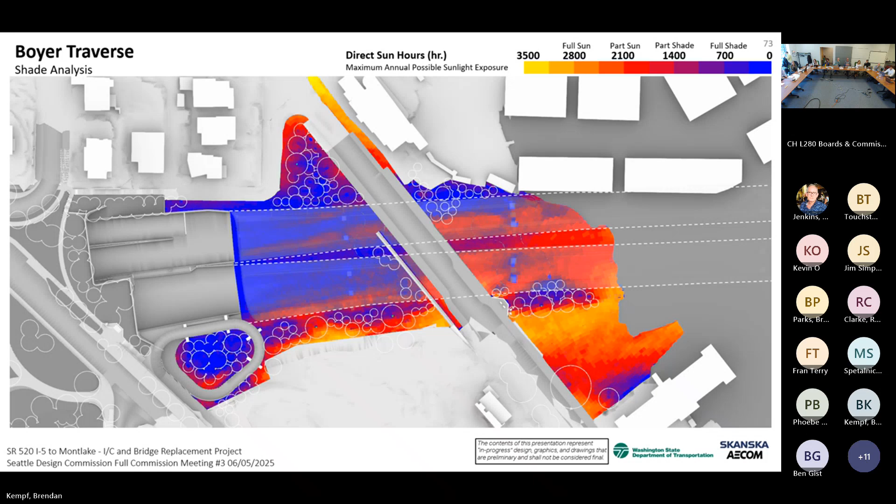We're being very mindful of these microclimates being created and looking for opportunities to still include vegetation. To that effect, we're carrying the tree palette through this area, with an emphasis on foundational evergreen trees, but also carrying through other species with seasonal color—deciduous trees, including the aspens we mentioned as a key component in the middle of the Delmar RS connector. There will also be restoration planting along the water's edge, and similar rockscape treatments for the under-bridge zones, particularly around the columns where there won't be enough light or water to sustain plants.

A couple quick views of that space. There is an outlook along Boyer—it's subtle, probably difficult to register in the view, but those two seat walls are shifted ever so slightly because the columns got shifted a little further east than initially anticipated, trying to reorient that view a bit while keeping the overall geometry of these outlooks consistent with the precedent from the prior Montlake phase and the other outlooks throughout the project.

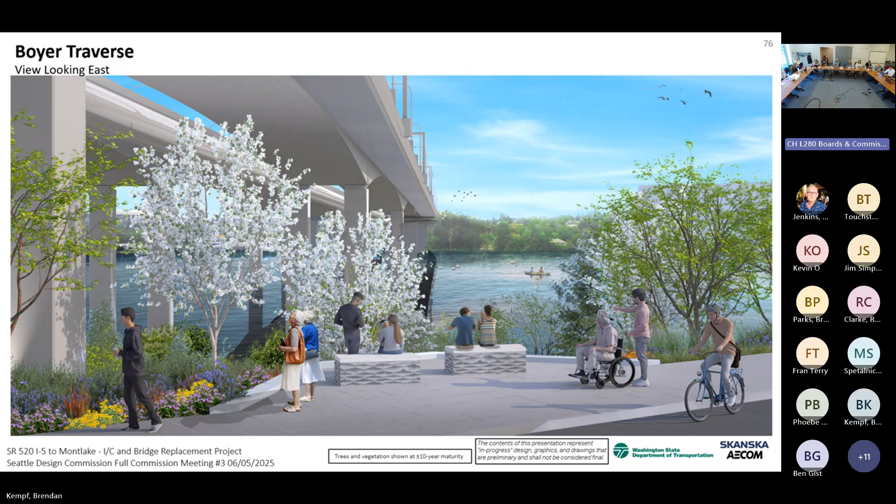And then another view back the other way, looking out towards Portage Bay. Are the columns in the previous rendering uplit? They are, yes. What you see in the background there is Pier 2, and Pier 3 - you can see one of those columns at the edge of the view. Those two piers will have 3 uplights on the sides, the two sides and the side facing Boyer, with a light down at the base to help light up that column in the evenings.

So they are uplit. Is that just for public safety, or what's the role of that? It's more about accentuating the columns and the experience than anything else, not necessarily a safety thing.

It dates back to our previous consultation with the design commission and trying to form a gateway along Boyer.

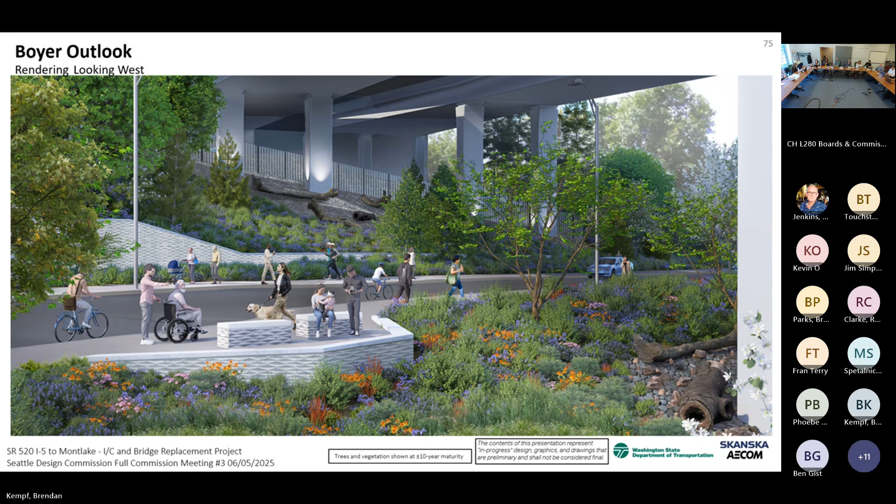As we continue - we talked at subcommittee a little bit about planting and making sure that your views are maintained. If you're making a place to take in views, then... agreed, yes. We definitely want to focus that view, and part of what the tree placement - of course still being refined - is trying to push that view a little off from dead center on that column, to prioritize the view shed of the actual water, and down along the columns but not necessarily at the columns. So we're trying to prioritize that view, and the tree planting can help frame it a little better.

Do you have a general sense of the pedestrian movement in this area daily, like what the numbers are? I do not, I mean I've been down there, it's pretty consistent. Does he have some pedestrian counts for this general area? Consistently busy, you're seeing? I would say so, it's a pretty major flat thoroughfare through there for pedestrians. There's a sidewalk, and bikes too.

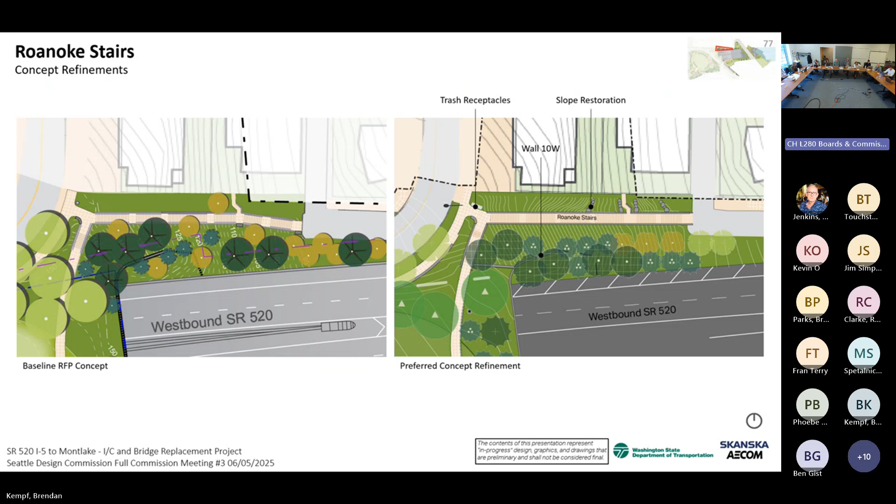We have about 50 feet of grade change, so over 100 steps. Just to quickly look at what that section looks like, it's substantial - trying to push a bike up or hold on to a bike and keep it from getting away from you as you're going down.

This is not a preferred spot for cyclist movements. We did straighten the stair a little bit, something we talked about in the recent workshop. If there's an opportunity to have a kink or break that up a little bit, but it really comes down to some of the spatial constraints we're working with in that area, not the least of which are the undergrounding of multiple utilities through that space, driving some significant offsets we need to be mindful of.

One of the locations where we've got the nudge signs, at a more pedestrian-focused zone, there is that short stair. This is probably the best view. This is another one of these cable railings relative to the one we were looking at by the Del Mar switchback - this is basically the next location where you'd see that, on the far side of the lid. There is a low wall helping to deal with some of the grade change that's necessary, and due to the fact that there's greater than a 4-foot drop, it has a 42-inch railing on top of that wall segment.

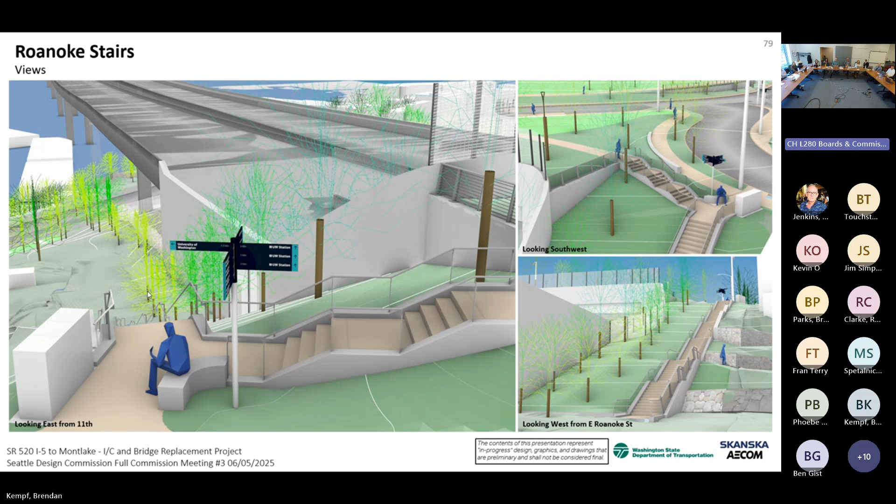Stretch my leg now. Roanoke stairs. Okay, and then we'll jump into the next section here on streetscapes and portals. Keep going. Yes, okay.

Just real quick, an overall view of all the things on the west side - we're looking a little bit southwest here. 520, the Portage Bay Bridge itself ending right about here, transitioning to the on-grade roadway. We were just talking about the Del Mar subconnector, the Roanoke stairs in the foreground here coming up. Then we've got the overall lid, the Roanoke open space, 10th Avenue. We also have the tunnel that we'll talk about in a little bit that continues out to the Harvard Trail, the Harvard Trailhead. And in a few moments, we'll touch briefly on the Fire Life Safety Building as well, located right here at the corner of 10th Avenue and East Roanoke.

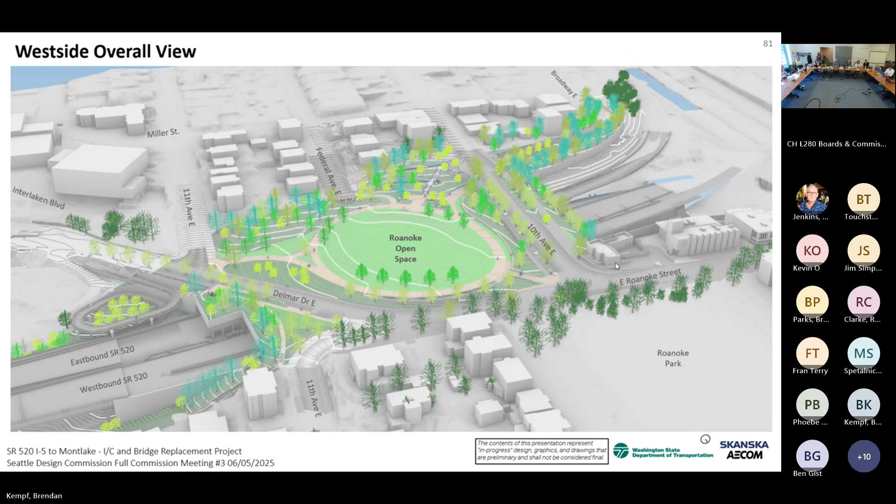So we're going to start out at the Harvard Trailhead and work our way inward. This is really the terminus point where future connections will lead commuters and cyclists all the way to downtown - definitely an important piece of this.

Trailhead will have that same mixing zone paving. There is an existing oak that we're working very hard to protect - it's one of the trees that was actually planted as part of the original roadside plantings when this highway went in. So we're working hard to keep that one.

Want to acknowledge that. One of the other big refinements here, you can see the amount of light-colored green is very different between these two views. Initially, the concept was that the outside edge on the north of the Harvard Trail would be a retaining wall, with a railing and one of the cable railings right there on the edge of the 14-foot wide SUP. As the design developed, there was an opportunity for a multitude of reasons, but that wall shifted outward about 20 feet or so, giving a little more room for plants along that edge, so you don't have such an exposed edge. It's sloping downward, and we no longer need a railing along this entire segment of the shared use path.

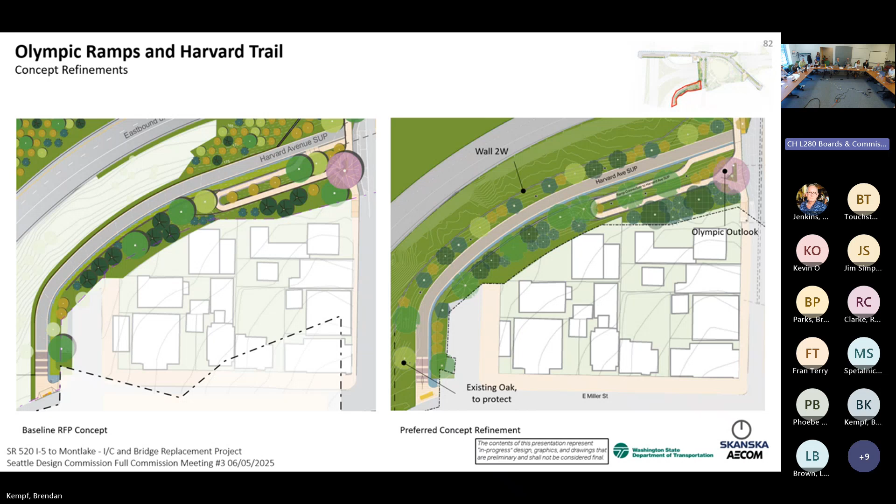So we've got a view of that trailhead pulled from that study model. You can see the openness towards the north side there. We do have lighting, signage, bollards here, and another set of trash receptacles off to the side. That wall, 2W, it in and of itself is functioning as the guardrail, so it sticks up to 42 inches, but it is set lower from the trail as well.

Continuing on a little bit further, the Olympic ramp and the tunnel there. One of the key things is we want to pack in as many trees as we can throughout the project, but given that we have the outlook here meant to frame a view towards the Olympic Mountains off in the distance, we're working with the planting layout and plant selection to make sure that directly in front we've got smaller, shorter stature trees that won't grow to a point where they block that view or become a maintenance hassle.

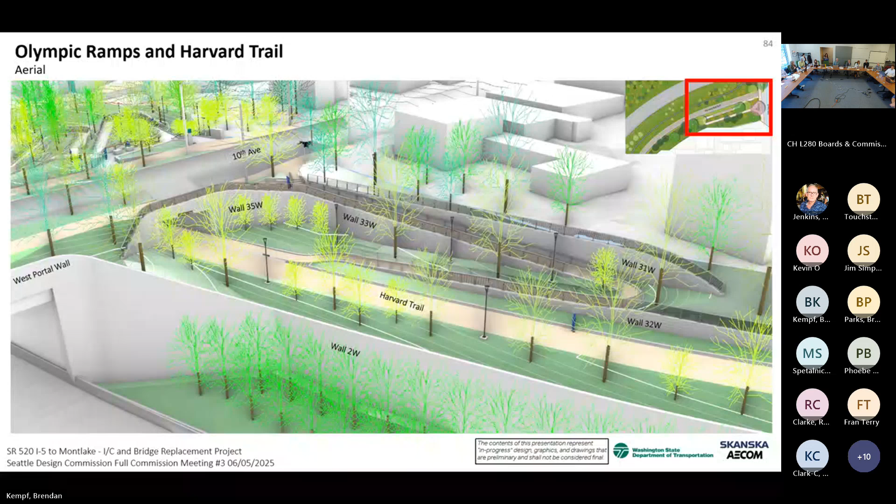One thing to note as we go through these views, particularly from our study model, is we're pulling in the lighting. This will be highlighting that transitional light fixture I mentioned at the very beginning, not the marina fixture used throughout the Montlake project, but now that we're on the other side of the bay, we're switching to a light fixture that we have far fewer of here.

And along 10th Avenue, also note we'll have these larger poles that are actually supporting the overhead catenary system for the King County Metro buses. So we're being mindful of those and their placement, working closely with the team and ultimately with SCL and King County Metro on where those can go.

Throughout the rest of the project, just to quickly speak to the railings, we do have multiple railing types, but these are all of the same design language here. We won't have that cable railing versus the bar railing coming into play in any of the rest of the areas we'll go through today.

This is all cable. Well, there's some variations here - some has the bar and some doesn't. Some will have a handrail integrated into the overall guardrail, and then where, like at the ramps, it's acting as both the guardrail and the handrail, those two elements are combined. In other locations, it'll just be a standalone handrail, and that handrail itself is a stainless steel handrail. So that's a common design element - there's a galvanized and stainless steel combination there, but that is also carried through what was established through the Montlake phase.

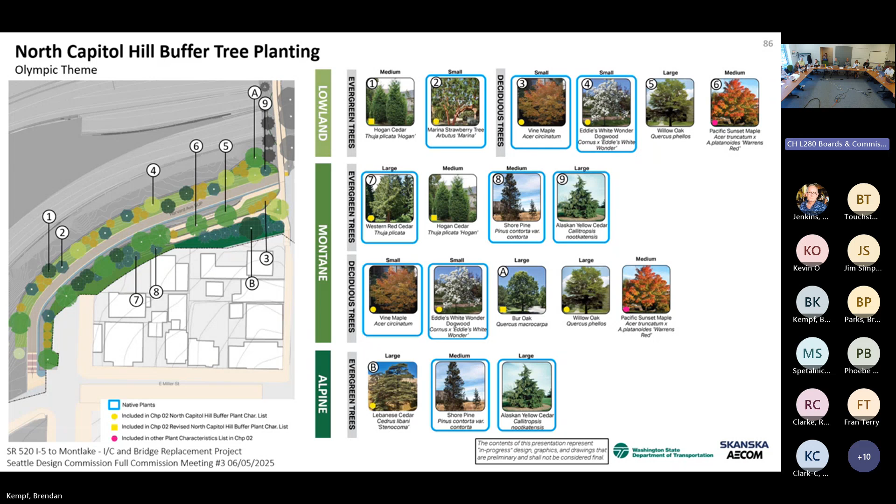At the outlook itself, we've talked a little bit about the changes and refinements here. We've kind of reconfigured the outlook to speak more of that trapezoidal design language. In some of the other outlooks it's inverted in this case, so it's actually framing the seat wall there as opposed to projecting outward like many of them do. There is a wood lean rail as part of the outlook experience along this side here, also framing in that outlook zone.

And then just thinking a little bit about the movements of pedestrians and how we anticipate them moving through this space, there's an opportunity to reshape that planter a little bit, open it up. Every square foot of exposed soil area we can provide is going to ultimately benefit the tree, so we're helping to open that up. This will be a specimen magnolia tree that goes in at this location.

And then the balance of the tree soil volume will also be provided by soil cells below the pavement. It's more of a technical piece we won't get into too much today, but we're getting into the weeds on exactly how many of those we need, working closely with SDOT on where we can do those and maximize the soil volume available to all the trees that are near pavement or on structure.

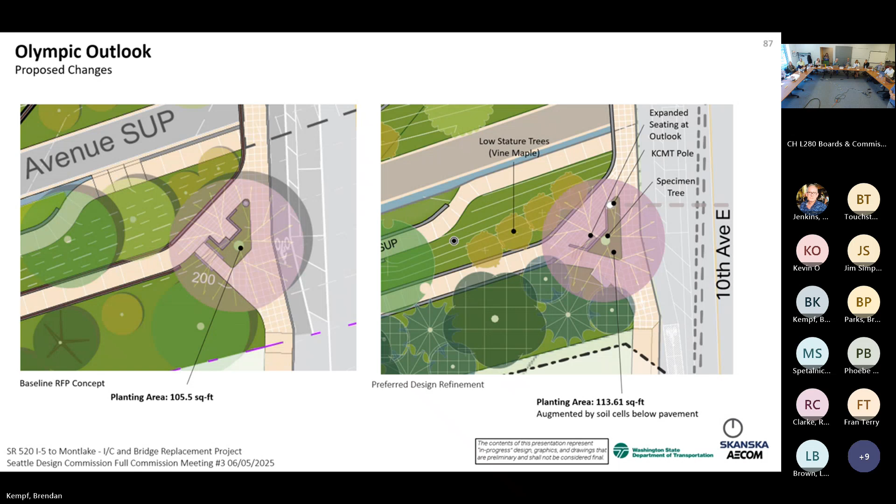There we go, another view from a little bit further up. Again, the study models we're working with, trying to combine all of the different elements. You can see the KCMT pole for the OCS, as well as that wood lean rail I mentioned, the configuration of the seat wall, low landscape wall helping frame things in, as well as some of the nudge signage at this location.

Coming from that Harvard trailhead, moving along heading eastbound, if one is not going to go up the ramp to get to 10th Avenue, the opportunity is to continue through the tunnel. This is the Harvard Tunnel, similar design configuration to the tunnel existing in Montlake. It'll have a 14-foot wide SUP, a rolled mountable curb, and a 6-foot wide sidewalk, so there's separation between pedestrian and cyclists through this tunnel. That separation also helps tie together an accessible route between either side.

One thing here in this view, you'll start to see those shadow lines. There's a series of panels with inflection points that vary, helping break up the plane of the side of the tunnel. The inflection points are part of how the concrete itself was formed and poured. So it's the concrete wall, but there's an inflection point for this upper portion, about 4.5 to 6 feet tall, and that inflection point varies from one 4-foot wide panel to the next. That'll create those shadow lines - a little variation, a little lip from one to the next, and a depression, helping break up that face so it doesn't have the same cleanness as you're going through.

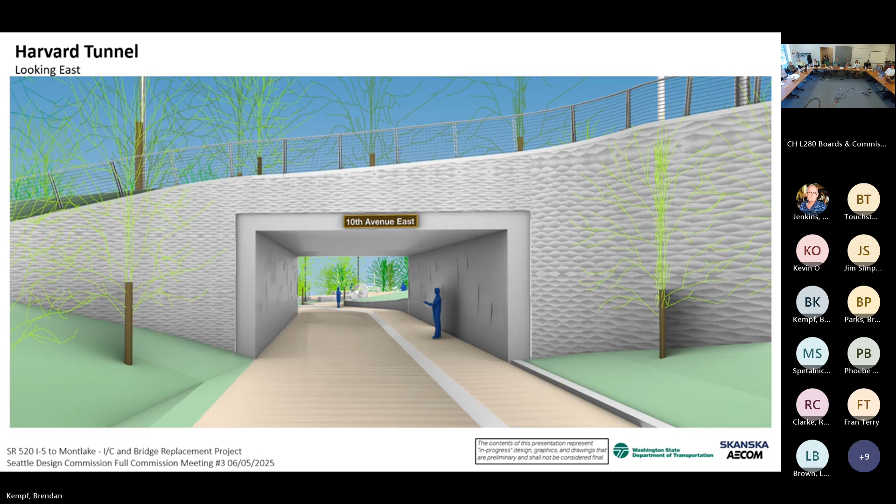And then the next view will be on the other side if you were heading westbound. So this is as if you've completed that full loop around the Great Lawn Path. This is just past that decision point where you would continue on towards the Harvard Trailhead, and that experience, that view.

A couple of these walls are helping deal with the grade change within the lid, the open space area itself. You can also see that adds a pattern you'll see throughout, very similar to what's out in Montlake. One thing not represented in a lot of these views, or really any of them at this time, is that these walls will be planted with vines, spaced in front of walls taller than 3 feet, so that over time it'll help lessen the massing of these walls.

Can I ask, was the pattern developed by Norris Soto? It certainly was, yes - that slide's coming up too. And that's also a major continuation from the Montlake phase, one of the design elements tying two projects together.

Jumping up to 10th Avenue here, there's a couple major design elements, really one critical design evolution from that baseline concept. On the east side of the street, north is going this way. There was an opportunity here to have the bike lane separate from the roadway itself and come up to the sidewalk level. But in the initial design, that wasn't present on the west side of the street. Through some consultation and community input, that was incorporated into the project.

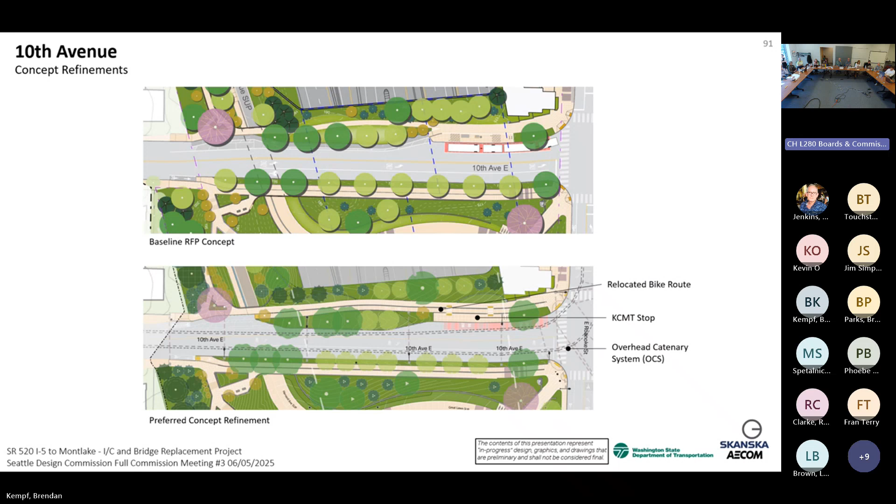And just a couple quick views of that again from the study model on the lower corner here. This is, let's see, the west sidewalk looking north, so we're looking down 10th, and that's where the bike lane will jump up to the sidewalk level and continue on. On the east sidewalk, that full width is the combined sidewalk and bike lane as well.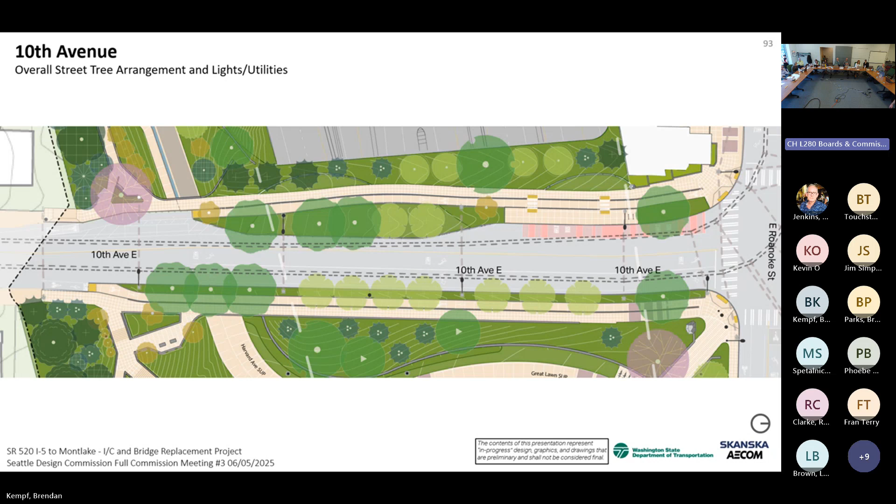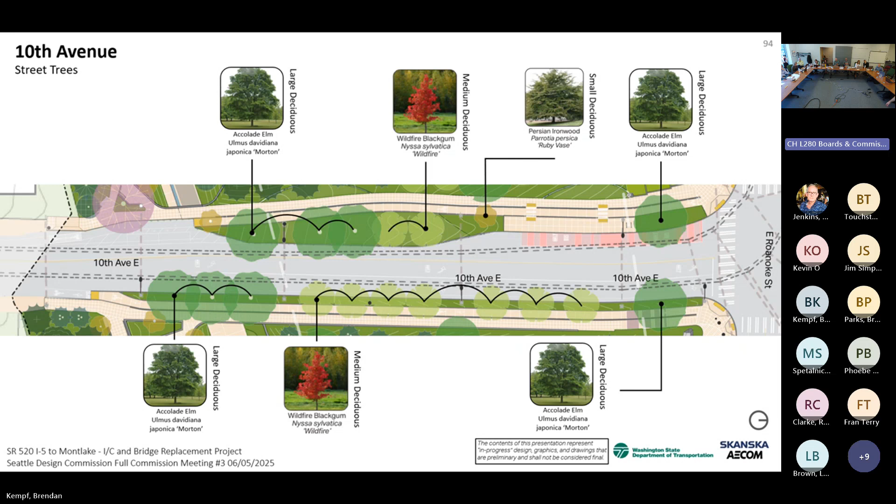So again, kind of talked about this already, but the overall alignment of the trees, aligning them across the street so that there's a rhythm, a consistency there, as well as an interplay between some of the larger elms and also wildfire black gum. So there'll be a combination of the elms with their deep, rich canopy, and then also the black gums that'll have this wonderful foliage color to accentuate that as well.

And then on the back side, so the trees we were just looking at being street trees maintained by SDOT, and then on the back side of the sidewalk here, a couple of lawn spaces, and then some additional trees out at the edge of the lid structure, a combination of catalpas with some more visual interest, one bur oak, kind of point loaded on Pier 3, one of the columns below, and then also some cedars and spruces that'll help add some evergreen foundational canopy on that edge.

As long as we're looking at that corner of 10th and Roanoke, just want to quickly address the fire life safety building. We heard a lot of feedback at our last SDC presentation and some great discussion in the last workshop that we had with you all as well. Just want to acknowledge we've all heard that feedback: primary feedback being improving the building relationships with the community and the adjacent fire station, improving upon the utilitarian appearance, the utility yard and reducing the visual impact of that, as well as incorporating more planting along the Roanoke frontage if feasible.

So WSDOT and the design build team are currently working on this. We're studying some design alternatives, and those will continue to be engaged with the design commission as well as the community through the Section 106 meetings going forward. So no updates today per se, beyond the fact that we've heard the feedback, we're working on it, and we're looking forward to being able to continue refining that.

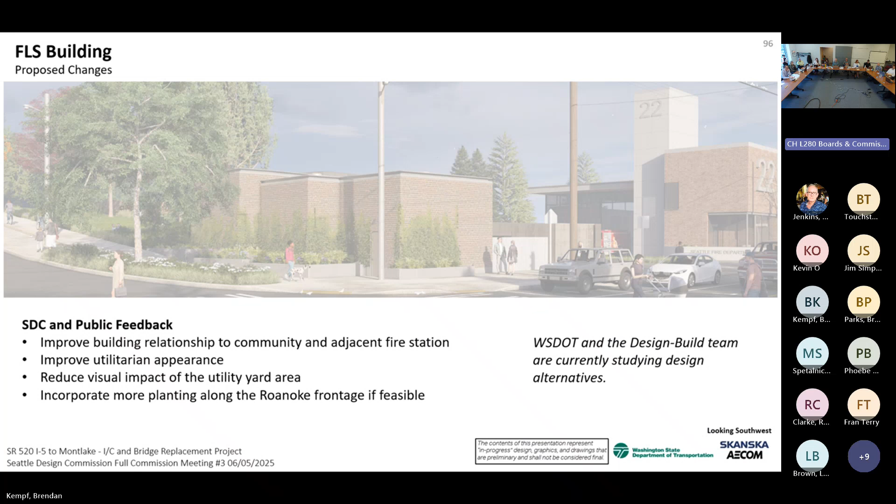Thanks, Todd. All right, so next topic here is portal walls and the portal experience. So start looking at, so this is the west portal. We're still kind of going around the edges of the lid and the open space. From the west side, we see here the composition of that portal.

We have the roadside walls here that are tying into, on the north, an existing vertical wall, and then on the south side, continuing into that wall 2W. That was the wall we were talking about a little bit earlier. That's just offset from the Harvard Trail, continuing on down to the south and following that I-5 northbound to SR 520 eastbound ramp that you see in the foreground.

I think we'll go through the next couple of slides and we'll be able to touch on some of the design elements throughout here. The next slide here, looking at kind of more how the parapet or the wall of the portal itself at the lid came together.

It was a delicate balance really between ensuring we've got the soil depths on the backside that are going to be supporting the plants and the trees in that zone that we were just talking about. And then also the important function of that wall, that barrier acting as the guardrail as well.

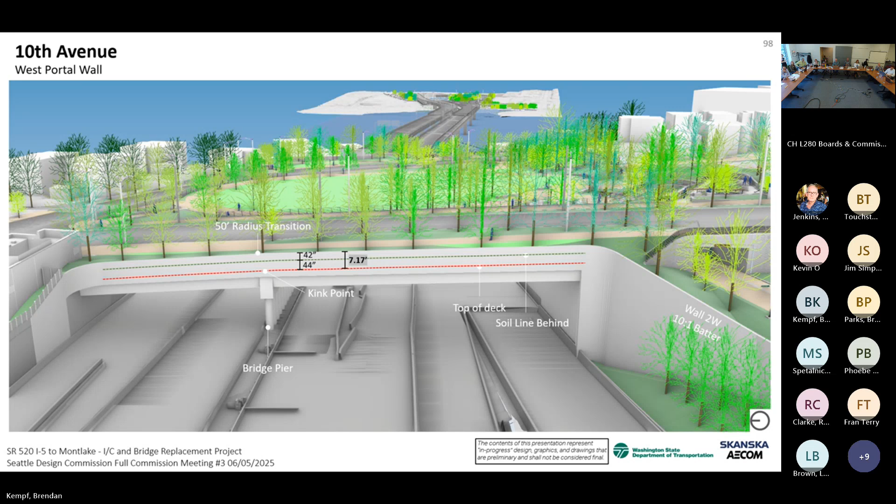One thing to note is that there's really two separate lid structures. There's one lid that's supporting 10th Avenue, and then there's another one for the Roanoke open space. And so there is a step down between the two. That was a topic of great discussion at our last meetings. And we realized that there was a little bit of extra geometry lurking in our model here.

Really that entire portion that's exposed and visible is a girder. So there's an I-beam girder right there at that edge. Very little of that stepped closure wall between the two structures is visible at all, so there's not a tremendous amount. The perception that maybe there was a canvas there to work with is, in fact, there's a girder there.

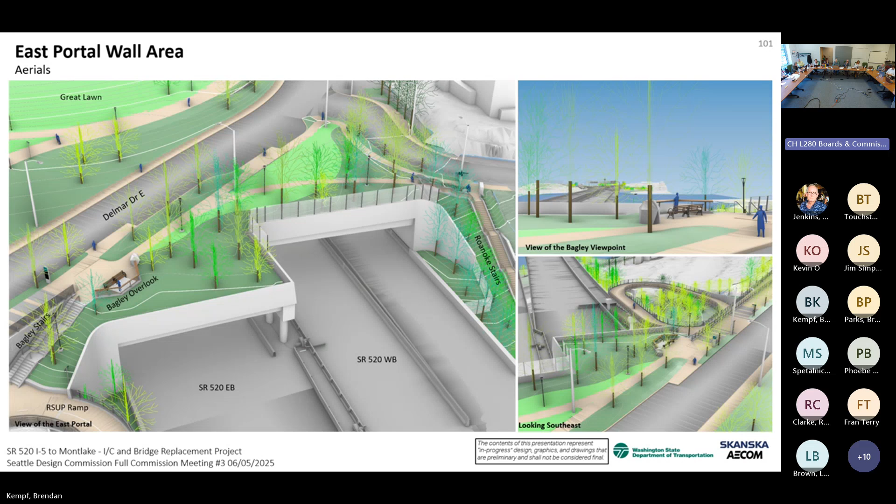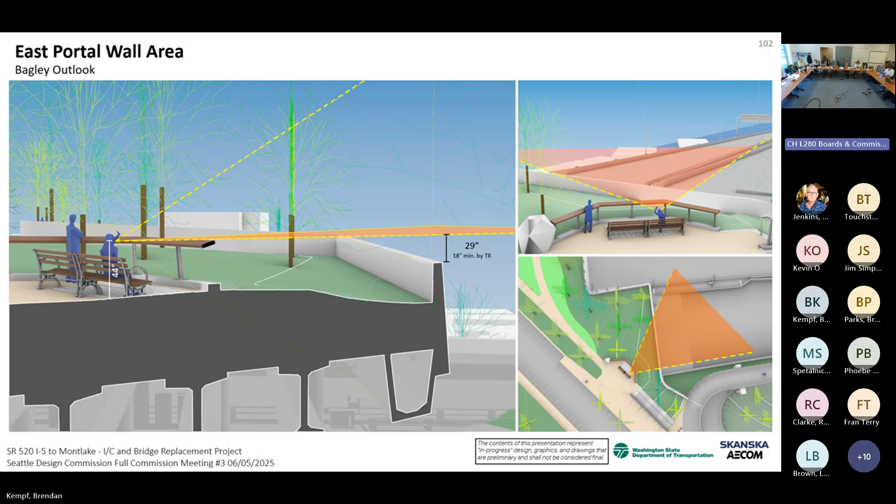As that comes together, let's go to the next slide. At the Bagley viewpoint, I want to note again the soil volumes and how we're setting the top of that barrier, how it wraps around. It will slope upward slightly back to that step back portion, while being very mindful of the Bagley viewpoint or overlook itself for the views out, keeping that barrier low but still balancing all the other constraints and needs.

This is talking a bit more about the soil volumes, the relative height of those barriers increasing a little just by the function of how that steps back. The pier cap itself, similar to the other side, extends that volume up so the end diaphragm isn't set in, limiting the number of changes or differences in the geometry there. It does come to a point.

That's also reinforced by the geometry of that pier cap at its outermost point. We do have a subtle radius as it comes back, and on the next slide, that radius is the same as the other radiuses, though it's a tighter radius, about 5 feet, so it's quite tight and subtle, not nearly as generous as the ones on the outer portal walls that come out from the roadway.

So again, a view. This also speaks a little bit to your question about the cars that'll split between those two piers.

The overall wall finishes play out here, with that Montlake ledge coming to that point in the foreground. One of the questions at the last workshop was that in some ways this almost feels like two separate portals, and the question came up about creating a pier wall for that portion that sticks out at the step back, as well as the discussion of potentially square columns.

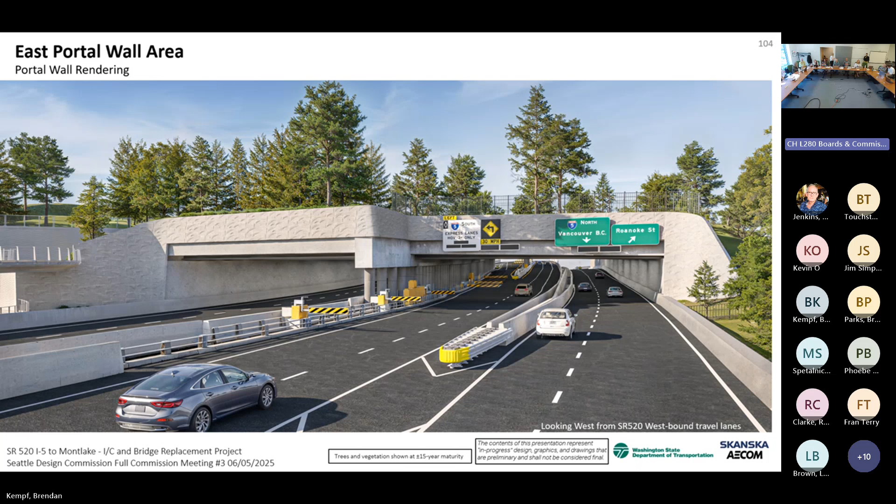Our design team had some key design optimizations that were able to lower the main line of the roadway level by about 2 feet through the tunnel to improve ventilation and airflow. Part of that was moving away from what was originally intended to be a set of pier walls to a row of columns that also helps open up and allow for more airflow to pass through.

Part of that came down to a set of round columns throughout, eliminating the pier walls altogether in favor of those columns as part of this overall ventilation strategy. So we don't have any fans, and I think visually that's an improvement because these fans would have been situated very close to the outside edges, part of the portal experience. So that's one key improvement.

We did look at the idea of introducing a portion of pier wall there, and that introduces some complications in terms of the airflow analyses that would have to be rerun as part of that. There are also some other competing challenges.

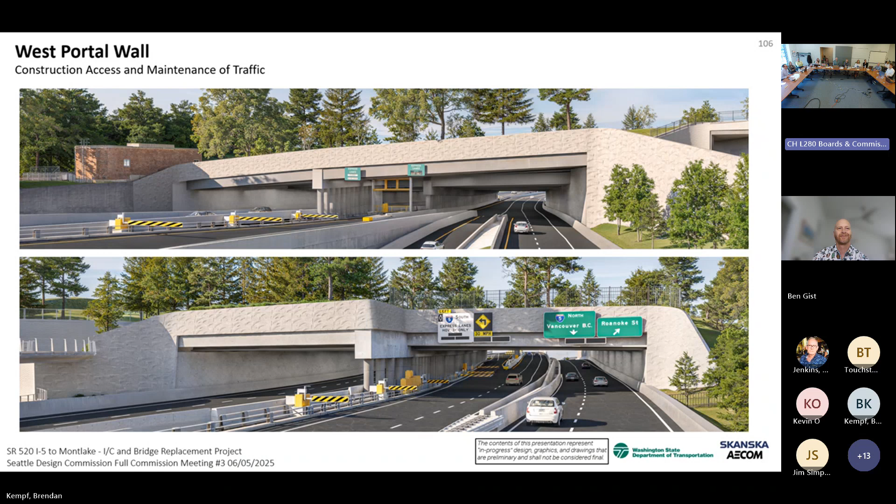I just want to disclose that there's not going to be any change with wall 44W. So maybe we can show us that - let's go to that, because you had proposed a change and then you unproposed a change, and where are we now? Sorry, I'm not as familiar with this. You're getting close, very close.

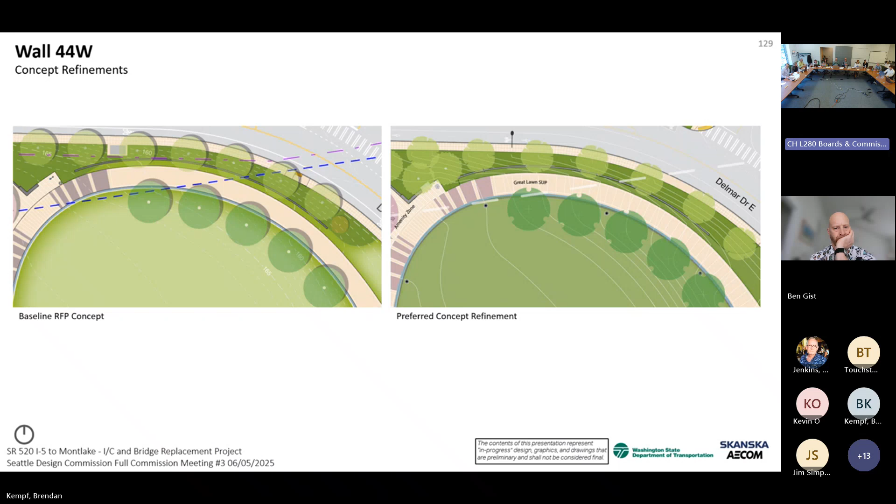Okay, so wall 44W - the initial concept was a single wall along the shared use path, between the shared use path and Roanoke and Delmar. Effectively, the concept refinement is really not a change per se to the wall itself. If we go to the next slide to highlight that - the initial baseline concept included a rock face wall here as that separation, a nod towards the Olmsted legacy and the kind of rock walls you see throughout the city. What happened over the course of the design, as we progressed, was that the shared use path elevation increased, so in this location it was higher than initially anticipated. As a result, we had a more significant grade change between the sidewalk and the shared use path.

Due to some other technical constraints and requirements related to the contract, use of a rock face wall was effectively precluded at this location, given that height differential. Taking a holistic view of the design as well as the contract constraints and technical requirements, the design refinement here was that it needed to transition to a wall that would have a guardrail given the height differences occurring here.

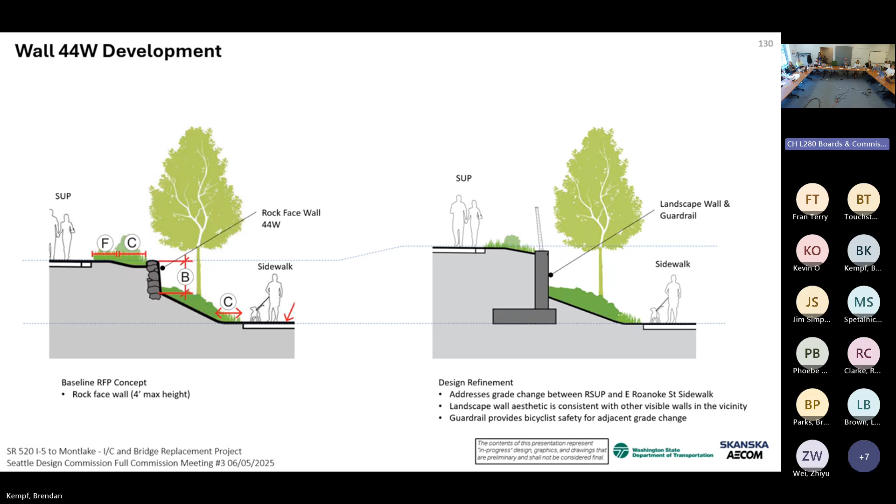I think we were going to do a study - this is the max section, right? Yes. And at either end, you have a short enough wall that you probably don't need this. Correct. Yeah, and the railing drops off as soon as it can.

Yeah, for me personally, out of all the things that we look at, the columns from below is the one that I think affects the pedestrian experience the most. That is really unfortunate.

I want to play devil's advocate and say it keeps soccer balls and things like that off the street, maybe, and there might be some real benefits, but certainly openness and welcomeness is not one of them. It doesn't integrate that space into the feeling of the community.

Anyways, I just wanted to make sure that got shown, because I think that's progressing. Okay, and you've warned us, this has been going back and forth for a while. Out of all the things it does have, the one thing about the order of the presentation that happens each time is that the lid is last, so you have to fly through it.

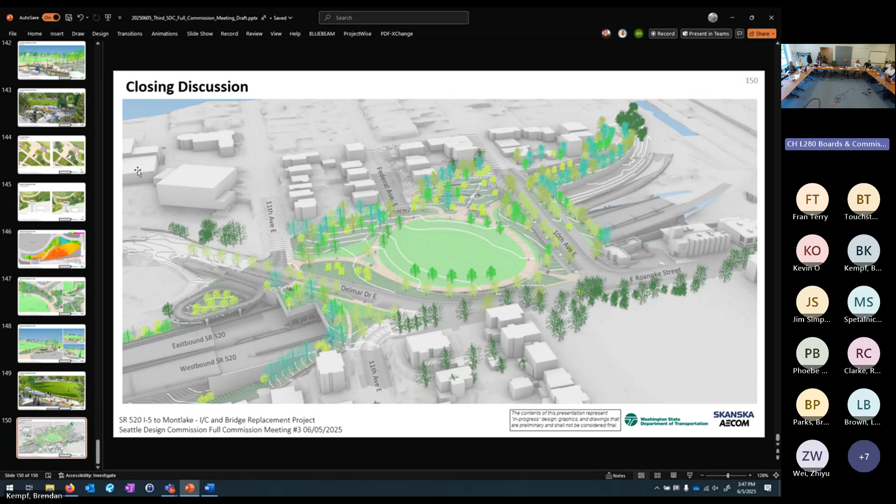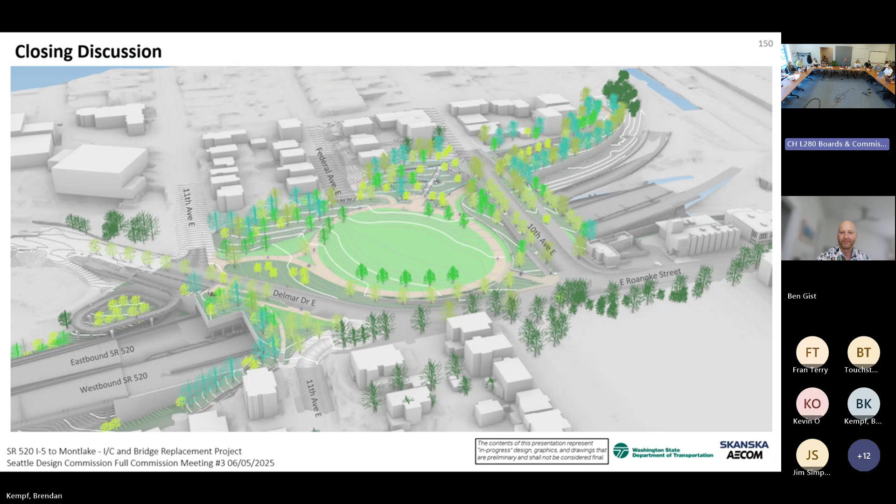And yes, vote. Really appreciate it, guys, so thank you for all the work, looking forward to more work. Thank you so much, and really excited to see the construction underway. Right, all the temporary sidings.

It's so we can get out there and build the real permanent stuff. Yeah, exactly, it's amazing how much work you have to do just to get access to do the actual work. Yeah, I've had to ask a lot of questions on that. Oh, really? Yeah, only small impacts. Yeah, what's the potential timeline for this effort? Is that years, even?

Design, 6 years to completion, okay, but design, what, another half? Is it finished design up? 6 to 8 months, I think, like into the year, maybe almost 1 more year.

One thing I wanted to point out, I didn't do it earlier, but when we were talking about some of the structural design, I'm not sure everybody remembers or realizes we're building on a past landslide, an ancient landslide between Boyer and Delmar, where that corkscrew is, the soils are horrible. So it is quite an engineering challenge.

When was the landslide? Well, it happened many times. In fact, there's a structure we affectionately call the WPA tunnel, SPU owns it. WPA was for a work project back in the 30s, where they built it basically like a mine shaft tunnel with a heading in it, to drain the water because of that landslide. It happened, don't quote me, but it's like in the 20s, 30s, and then in the 50s, and also on 10th Avenue on the south side, because the lid structures also affected those landslide-prone soils. There were landslides when they built 520 on the south side of 10th. So it was a challenge.